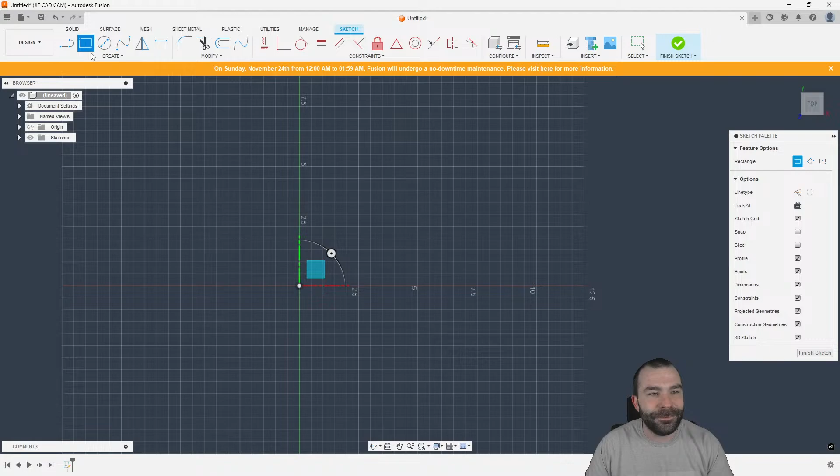So maybe I'll start a new name for myself - not Fusion Phil, but maybe Four-Wheel Phil or something at this point. Anyways, somebody reached out to me late last night and said, hey man, I would really like to draw an intake plenum for one of my automotive projects. I told him this would be a great subject to kick off this week. As always guys, you have the freedom to ask questions at any time, we can pivot to questions you have. I'm going to kick this off with some CAD stuff. Actually, there's Guy himself, the one who was bugging me about this. As I instructed Guy, there were a couple things based off his design that he showed me, and I'm going to show you guys a couple ways you can accomplish something like this. So for any of you that know me, you know I love rectangles, right?

In the event of the design he sent me, there was a stagger when looking down on that actual part profile. So I'm going to go ahead and dimension this up.

As you can see here, we can give that an overall width. I'm going to guesstimate a lot of these numbers, so if you're wondering, the numbers aren't necessarily important in this case. However, you'll be able to scale this up or down as needed. Overall length, of course, as well.

Let's go ahead and put it at 12 inches. From here, we can dimension off the end if needed, maybe 1 inch again at the other end. With that, I can tie those 1 inch marks together by clicking that other dimension.

So this is kind of a mirrored part, it's actually spun 180 degrees. The one that Guy plans to actually use and make at the end of the day, he's not going to have this offset, but the process from here forward ends up the same, right?

So I'm going to extrude this, and what you guys are going to see here is this is going to take shape relatively fast. So again, you have your distance, whatever you're feeling necessary, and then from there I need to set, and I'm going to use chamfer, but the idea is I could set the angles for my intake runners, whatever that may be.

As you guys can see, I'm just using equal distance. Maybe I want to do distance and angle because I need them a little steeper or a little more shallow based on that profile. Fully customizable and editable with this system right here.

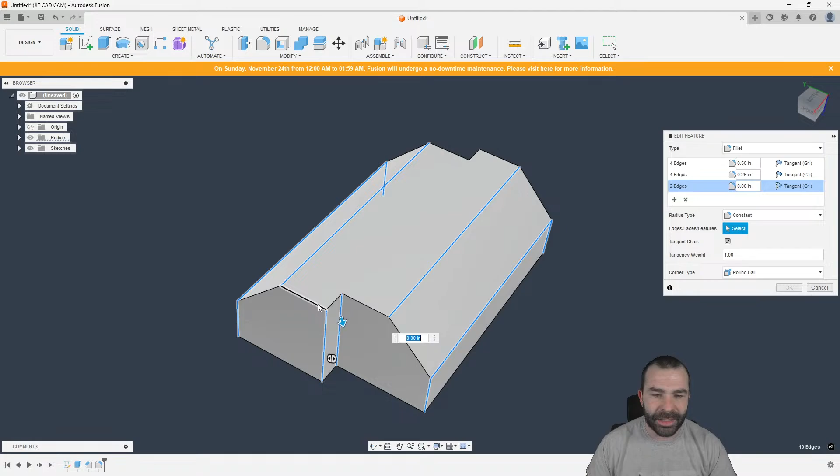And then lastly, I'm going to add a few more as we work around the outside of this part. So give me a few seconds to select all my edges. You're going to see the value of this when we do our next step, which is using the shell command to actually make a tub out of this.

So again, maybe we're going to go to, I don't know, what can we get away with? Can we get with a 3/4? We can't, because it's too tight of a radius in here. Again, we did a 1-inch offset, so maybe we can bump that up to 1/2 inch. Nope, we're going to go down to 375.

And as you're seeing, all those fillets are starting to populate around my profile. Now again, guys, I'm no expert on intake plenums, and I'm far from an expert in the modeling environment. However, as you can see, sometimes it's not about how you get to the finish line, as long as you get to the finish line.

In Guy's case, he loves racing, and if the guy in the other lane blows his engine, you still got a chance regardless, right?

So let's use our shell command and pick our top surface. I'm going to set my wall thickness to whatever I'd like it to be. As you can see, by using the shell command later in the process, it's carrying all of my fillets from the inside right into the outside to the inside. So we're going to go ahead and hit OK.

Next thing I would want to do, in his case, he's going to put a cover on top of this, and we would actually have to give this our intake port in that, but it goes pretty smooth. So based on this face here, I am going to create an offset, and what that allows me to do is generate a flange surface. Again, we'd have somewhere to put our bolt holes down through, and we're going to drag that down. Now we have that lovely lip sitting around.

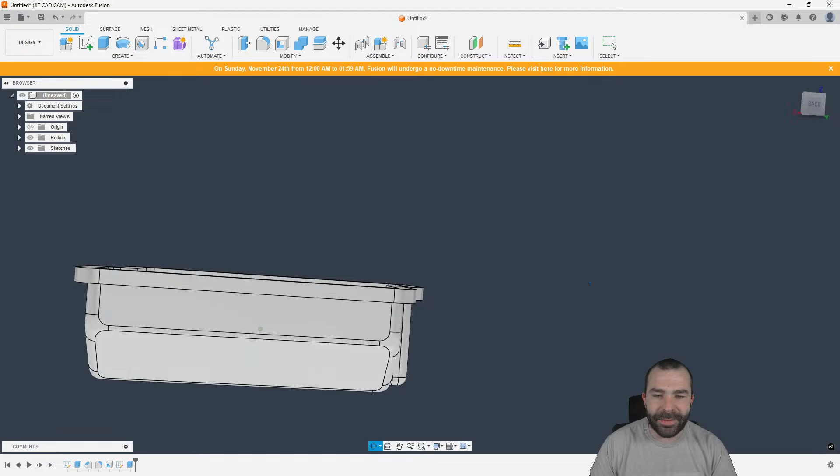If I wanted to, I could also add a few more offsets if you were going to put an actual O-ring groove in here, or in his case, I assume he's going to use Form-A-Gasket. Now again, we could just rinse and repeat the process, right?

I want to put my actual intake runner hole locations. I'm going to drop a line, this is going to be a construction line. What I'm looking for is just to generically place that line on that face, because later on I'm going to come through and dimension that out. That might be a little hard for you guys to see, so I'm going to select it. If I wanted to dimension this, we could set dimensions from wherever that dimension comes from, fully constraining it. Now let's go back and do our circle.

We do not want that as a construction line. I'm going to throw one at the end. Again, this is for a Chevy V8, if I remember correctly, right, Guy? I could go ahead and define those parts and where those hole locations are. Using a few things like constraints, we could equal up our circles. All 4 of these are going to be identical. As you can see here, we've now equaled them all together.

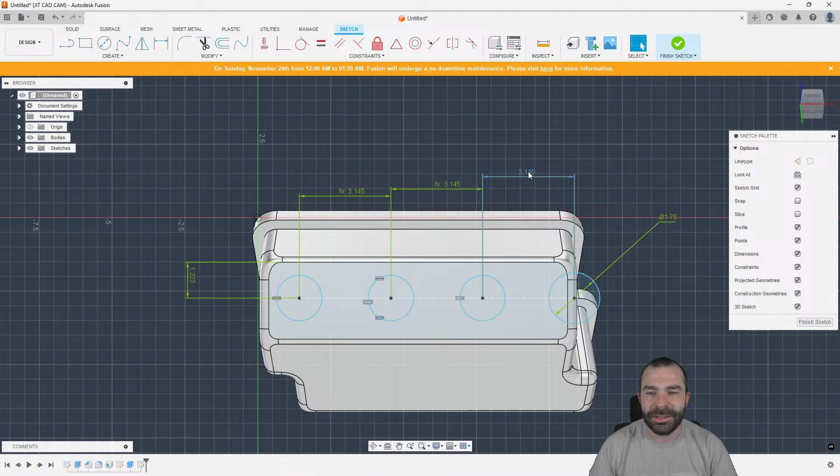And then we'll add a hole dimension, right? So let's say we're going to go 1 3/4 inches. Again, you could dimension from the end, allowing us to link these together at any time, making it easy. In his world, everything is actually kind of on center the same distance. So we could tie those dimensions together, allowing us only to have to change one dimension and making everything shift accordingly. As you guys are seeing here, I'm actually going to undo that because I think my circles aren't necessarily constrained properly, or I typed in the wrong number like I always do.

So what is happening here? This is fun, I always love when we do this stuff and everything goes ahead and breaks in a live setting. As you can see, by typing in the distance between those dots, which should be the circle center, I have somehow automatically broken Fusion, and my sketch has disappeared. This will happen from time to time, it's not a big deal, guys. We're just going to back up a few steps, maybe remove these dimensions, and see if we can attempt that one more time, fixing it.

So again, we have that first dimension. Let's go ahead and set the dimension for the first gap and then go through and dimension again and make sure things don't break. Now, I'm going to go out on a limb and assume that I don't have one of these circles actually on that line, and that is where those problems are coming from. The same thing here is it looks like, although I went ahead and dimensioned my first intake hole or my runner hole, I forgot to actually constrain them all to the same size as well.

So let's go ahead and equal those up. Again, we'll just get this a little bit away from the fillet. And then once we get those set where we like it or whatever we're going to do, we can simply go through and extrude those holes.

In the meantime, I see a lot of you guys out there, hole 3 and hole 4 not equal. Yep, I just caught that.

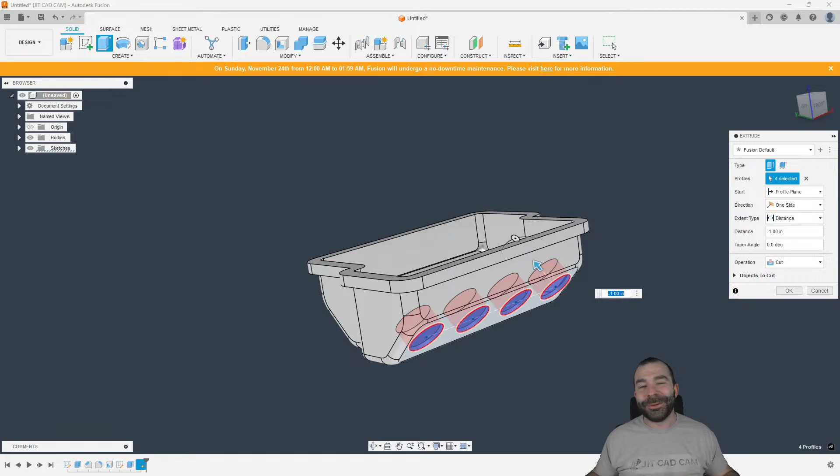Deep Thinker, great to see you in here. I should run through chat here. Adrian, awesome, hello, great to see you. Who else is up in here? We have Travis, Tim F's Adventure. Yeah, volume went down 100%. It looks like Chris Carter too. Guys, I love seeing you guys all in here. I busted out, this is the first shirt. So if you guys didn't know, I made this shirt with an iron and that printout when I went into business over a year ago off on my own.

So again, you guys can see we went ahead and made our intake holes or our runner holes for that intake. I could also add, again, another sketch, do the same thing on the other side, just a repeat. Maybe I want to give this a port to the front.

Again, everyone is different, let's not show favoritism here, even though in my opinion, yes, Chevy is much better than Ford. But let's go ahead and do an ellipse as if this was going to be our front intake hole here. And again, we do that extrude. We could do an offset to create that flange feature. No right or wrong system here, but as you guys can see, it's relatively straightforward to do something like this.

I still need to add my holes for bolting my two halves together. We could do that simply by placing our first hole over here. I'm not going to get too crazy with its location. Let's go ahead and say that's a 250 hole.

Something I think a lot of people don't realize Fusion can do is use the pattern tool to do a pattern on path and pattern a feature. I can go down to my timeline, grab that hole, and my path is now the actual rail inside my part, so I can create a hole pattern that chases around my part. Notice here I'm on center, aligning to the path based on one direction.

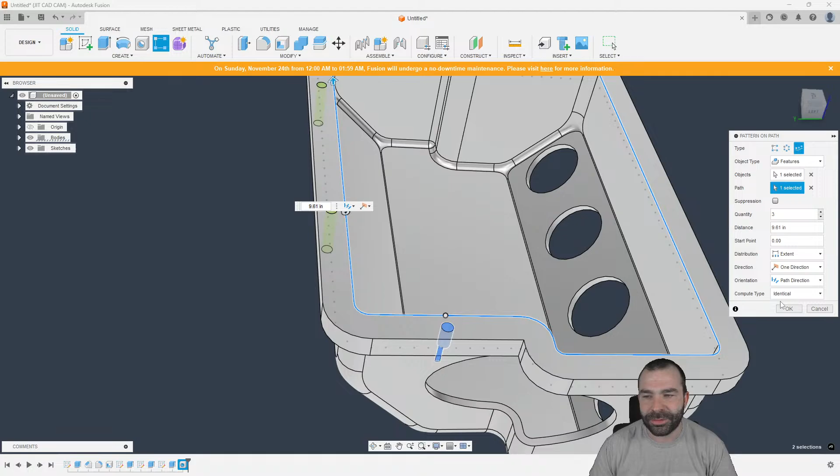We can go in and change this—say optimize, say identical, or change to path direction. Based on the path direction, it is now aligned to the outside of my part profile.

If I wanted to put in 24 of these and drag them all the way around, that path is going all the way around my part. Whatever the length of that inside area is, I can generate all the way around my part. So it's very easy to place all those holes for bolting my two halves together.

The reason I like using pattern at the solid level is, one, it calculates much faster, and two, when I'm creating a feature—whether an extrude or in this case using the hole tool—I have the ability to roll my timeline back and go, hey, I forgot I want to put a chamfer on the top of that hole.

For all of you in chat, don't hassle me about the fact I could have done that when I used the hole tool. What I'm showing you is that by putting it on as a separate feature and rolling my timeline forward, I can add that as an additional object in my pattern. So by adding the chamfer with the hole command, it's automatically going around and creating that pattern.

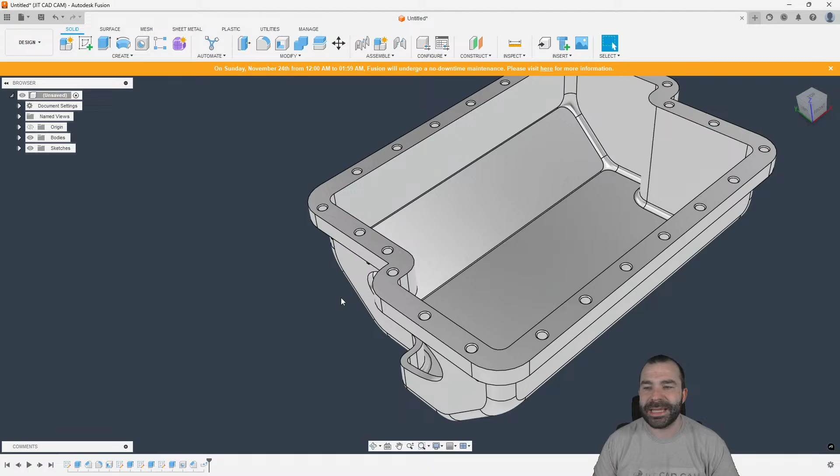Any other questions out there? As you've seen, I've been able to do quite a bit in a short period of time, all because I've structured a pretty simple timeline down at the bottom, allowing me to adjust along the way. Although it looks like a complex part, you can very efficiently design something complex if you take a few steps back to work on what you need specifically.

Again, stacking up my fillets all in one spot, doing my fillets before my shell command makes all the difference for the way that volume is removed.

Uh-oh. Hey, Kosh, how's it going?

Did you have two separate components in an assembly and then remove any intersecting geometry? Yeah, 100%—you can do that fully.

So Autodesk Fusion 360 Ambassador—what is that title? That's a good title. I prefer the one my wife calls me all the time: the guy that has no idea what he's doing.

But you are correct, so what I'm going to do is create two components as he's asking. We'll go ahead and use A, and again we'll go up and do B. Then we're just going to create nothing more than simple shapes. I like simple shapes because the idea isn't necessarily the body itself—in this case it's going to be the outcome of the two bodies. So at any time, Kosh, if you see me doing something wrong, please let me know, and if you were thinking about this a different way, by all means let me know.

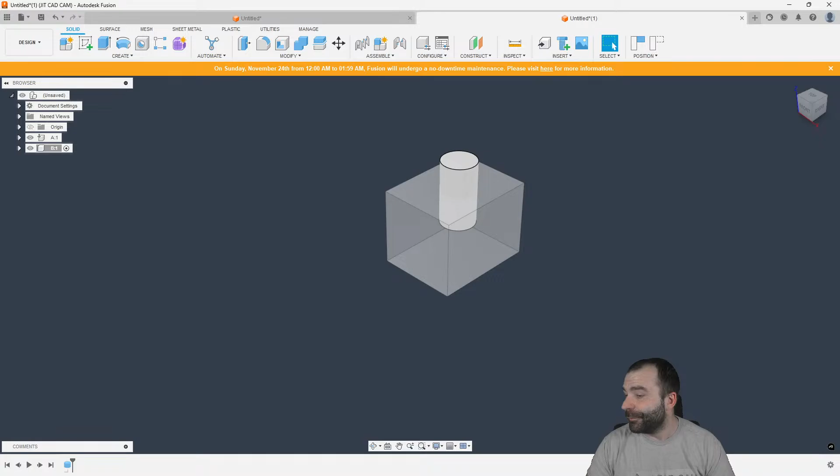So you want to remove the intersecting geometry between the two. You don't want to keep intersecting geometry; you want to just remove said geometry. So if I had two parts overlapping as such, if I did a combine command, one, I am going to capture this position because you guys saw me manually move it. But if I took my two parts and said cut, I can cut one using the other in this use case.

So what I would do is actually reverse my selection here, pick my actual cylinder, then pick my square. And as you can see, I'm now removing the intersect between the two, but I want to keep my tool. What that means is we're going to keep that original part there. So by hitting OK, you can see I now have a shorter cylinder, and on top of that, I'm still retaining that actual stock box in the background.

I apologize for the stock box. The machinist in me says stock box.

But just like that, doing that combine, I am combining two bodies. I'm actually cutting one body using the other body across two completely different components.

I guess today's kind of design theme, huh? I mean, that is it 100%. So, Chris, I am so glad you pointed that out because this one will blow your guys' mind. This one, I actually made a short video in my YouTube collection. It's probably one of the worst videos I have made. The audio sucks and the video sucks, so it's a twofer.

But if you're doing soft jaws, right? And I'm going to do this the worst way possible. But let's just say here's one of my jaws. And now I want to go in and cut those jaws. But I'm going to draw a part that's going to cause kind of a dilemma, right? So let's say this is my part. And you guys will see this come full force here in a second.

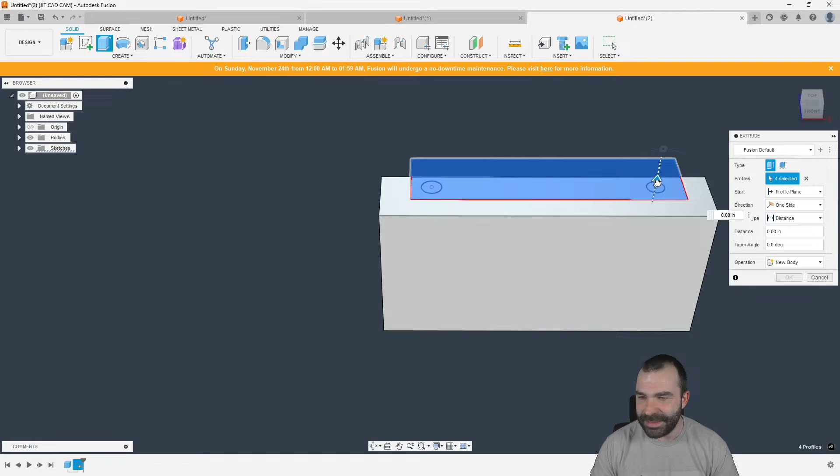If you're making soft jaws, let's go ahead and bring this down. It's going to be a new body. And we're going to repeat that extrude back the other way, right? Trying to think in my brain which way I thought to do this. Okay, we're actually going to extrude this outer profile back up. Again, new body, and then we're going to combine these two things together, right?

So we are going to end up with a kind of funny situation here because I am now going to move this downwards, right? Oh, back up a couple of steps here. Because when we went in and did our combine, we don't need to keep tool. Okay, so we're going to move this guy down, right? And we're going to cause a conflict with what's going on. So we want to move the whole body.

There we go. So if I do a soft jaw kind of move here, I'm going to do my combine, and I'm going to cut this using this, right? Now, as you kind of see, we're going to have these floating cylinders there. And this used to happen to me quite a bit. We're going to keep the tool again because I would like to keep my part for machining purposes.

But notice what happened to my body count. So I'm going to back up. We went from one body to two bodies. And when I did that combine, we now have three and four bodies, right? So you see these two guys floating out in space. And you should have done this with components, which would have been the right way to do it. These are going to get in your way. They're going to cause problems.

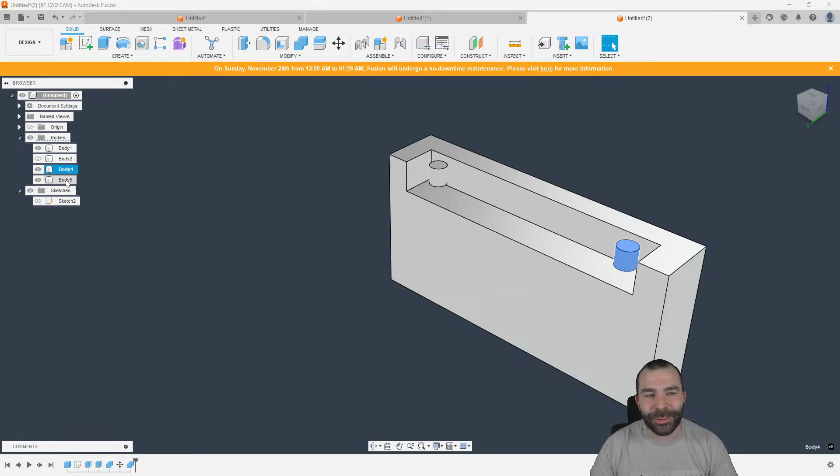But I can actually go to these bodies, right click, come down here and hit remove. And what that does, as you can see, is remove that body completely out of my timeline, right? So because we have that floating individual body or piece of a component out there that could cause problems, you can just right click and remove that stuff to get it out of the way. So I'm going to get back over to the chat.

Awesome. 100% perfect for soft jaws. Cool. Yep, you can 100%. So you have that ability to modify a body using another body, even at the component level. So you can jump across components depending on that.

Kosh, if you're still out there, I would show you this one as well. I think a lot of people don't quite think this through fully. This is a really good example.

I designed this as an individual part rather than a component. I actually broke a rule because at the end of the day, the guy's going to want to put his runners on here as well as that top hat section. So what I'm going to do is save this as plenum lower.

The proper way I should have designed this is to start out with new components, as you saw me do. It's too late for that, but early enough that we can restart the process without redesigning everything. So I'm bringing that component in and breaking the link, which turns our new file into an assembly up from the original component.

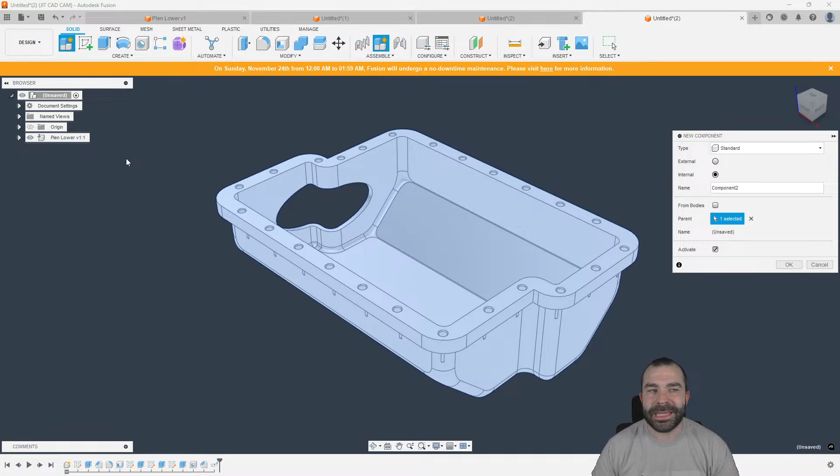So now we have our upper section. By having my upper active, I could create a sketch against this face if I wanted. For demonstration purposes, we're just going to keep it very square, but I want to show you why this is so important.

You'll see all these holes pulling through automatically. The way my timeline works is kind of like chapters in a book. You don't want to jump from one chapter to another or read a chapter before certain others.

Yours truly doesn't know how to read. Still sometimes have to take my boots off to count to 20.

As you'll see, I can at any time in my timeline, if I remember that pattern, go back and edit it. Because that pattern occurred long before we created the upper component, you're seeing it jump across components with its history.

When you're designing or building an assembly, it's nice to create your features in a certain order so they carry through from one to the other. We wouldn't want Guy to have a problem with his actual bolt hole pattern not lining up. That's how we've now stacked these two together to achieve that task.

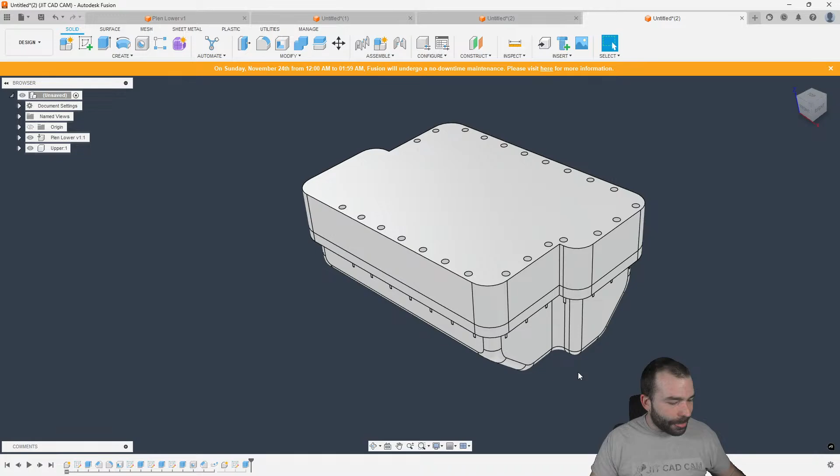Another thing we could do is just rinse and repeat from here, guys. We can add another new component. This could be, you know, left-hand runner. Again, we create our sketch based on our spacing here. This is very valuable to know as we start to build our other items.

So if I go ahead and create my offset, I want to go ahead and create a flange around this possibly as well. Let's go ahead and just do nothing more than a slot. Make our lives easy.

This is going to look a little wild. So those of you out there always judging me about how terrible I am at some of this stuff, more than okay. But there is our flange.

Now I can go in, and if I wanted to extend out the actual tubing, I could do that as well. So again, we could do our join.

Maybe he's not going to use something of this nature. He might actually use a loft between two surfaces. You guys have a lot of ways to manipulate this. The idea is you're now starting to see the way components stack up and the way you can place components to achieve whatever it is that you're trying to do.

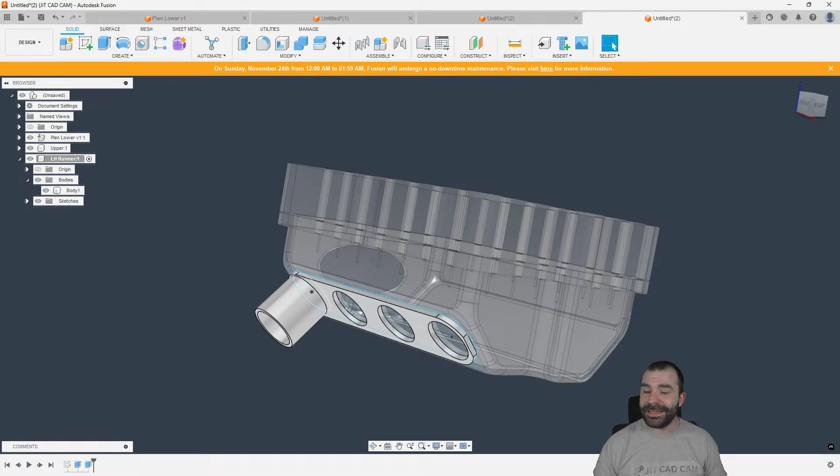How's everybody's week outside of that? I'm surprised we don't have any CAM questions yet. People are like, oh, he's doing modeling. Do all this modeling stuff. This will be fun. Again, opening that floor up for any questions, any problems anybody's having. It always seems like you guys just more enjoy watching me work than it is anything else.

Deep Thinker, I see your question. So is that one solid body now? When I did that, no, that actually turned it into two separate bodies. I can't remember what part you were asking about, but when I did my combine command, I actually pulled it to do a cut and keep, not a join type of scenario.

Anybody else? I love when you guys don't ask questions. You make me nervous. Should I just keep plugging away at something like this? That's what I'm going to do. I'm just going to keep designing this part free of charge. You guys will be able to see it all.

What we're actually going to do is we're going to change things up here a little bit on how this design is. We're going to go new body. Let's actually go down a ways. And we have that flange now. With that flange, we're going to start to build out the next little segments. So what I'm going to do here is I'm going to actually reach back across.

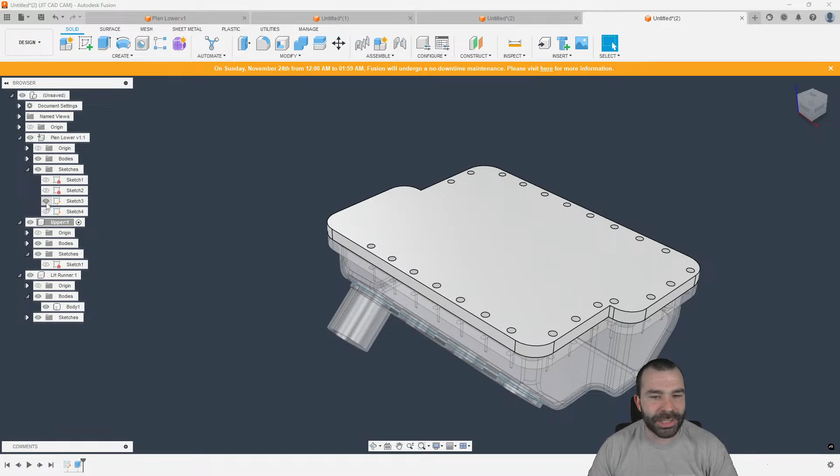And what I'm looking for is the sketch to the lower. Where did we do that projected sketch? Let's go back. There we go. Again, we can go ahead and use that sketch by getting the body out of the way. And we're going to take the outside and the inside. Again, bringing it up, doing a join because we want those two bodies to intersect. And then from here, we could start to change and modify our profiles.

Is there an easy way to work with a DXF file without clicking thousands of lines? All right, that's a good one, Chris. Chris, what is your application is what I'm going to ask you. Are you trying to do laser plasma work, or are you trying to convert a DXF to a solid model? And I would also have to ask, are there multiple sketches in this DXF that you're referring to?

In the meantime, we're going to go ahead and turn off the lower, and let's go ahead and get the left hand out of the way because we can go in and do our shell command again. Now, what you're going to notice is based on our shell command, we have that full freedom to go in, plug in whatever it is. But one thing that is going to happen here because of our holes, again, our timeline is very important to how things are going to interact with one another.

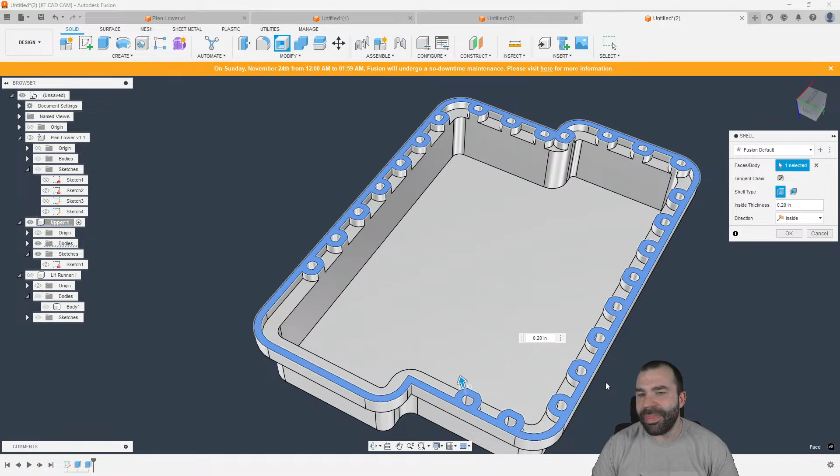So we may want to extrude those holes first time round and then come through and put the holes in later. So you guys did see me do something that could be classified as a little bit lazy. And we could roll back our timeline again to when we did that first extrude. I'm going to go in and we're going to actually punch all the holes in this here real quick. Again, what you'll see happen now when I hit OK is it has fixed and cleaned up this edge. But something it has also done, based off how we've done this, is it's not only shelled out the entire part, but it's given us that wall thickness through everything.

Engraving with a CNC. Okay, I like this. This is a good question. So I would say, are you using like trace or 2D contour for the engraving toolpath, Chris? Mastercam. Gonna use Mastercam to select all those edges. Awesome. So Chris, check this out.

So I actually had to do this with a customer of mine. I am gonna replicate this because I do not actually have a DXF to pull up quickly, but I've completed exactly that, right? So I have my sketches here. I am going to go ahead and place this on a box, and then we're going to have the freedom to engrave this as you're asking.

So when I go to manufacture, if I'm going to do my normal setup, this is where we find out that old Fusion over here doesn't know which way Z-axis is. But if I go to 2D Trace, for example, and I'm using 2D Trace because it's on center, as well, it is not utilizing a lead in and lead out scenario, right?

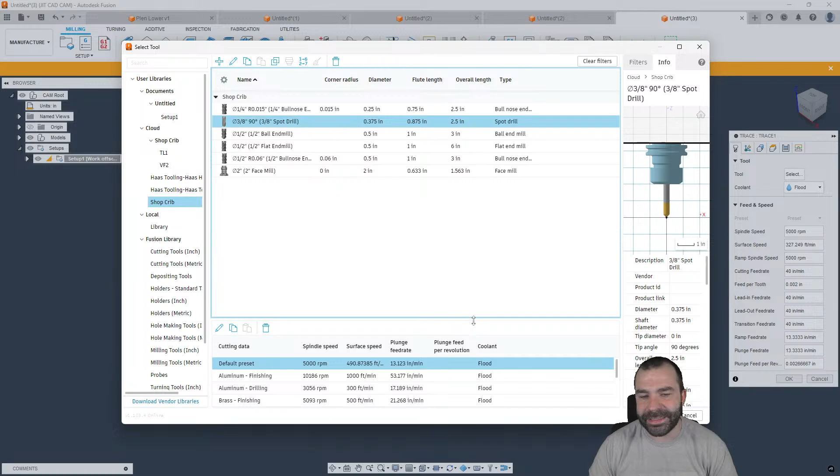So I've picked my tool. Now, in Chris's case, he doesn't want to go through, and as you see here, I have 3 separate little segments of lines that I would have to pick. Now, I did luck out because these are boundaries, so it does actually see this as a closed chain and loop itself back around. But what I can do, instead of selecting all these edges,

I'm going to go back to my model, and where that DXF sits, which is going to be a sketch, I can pick that instead. And upon hitting OK, what you're going to see is that it is now going to go out and trace that actual sketch, regardless of how it looks.

And if I was to go back to design, this is, again, kind of something nice. So if you wanted to change this, maybe we're going to add a line across here for that customer, and then I'm going to sprinkle in, let's throw a spline at it, right? So again, when I add more sketch lines to that sketch, when we jump back to manufacture, of course, we'll have that error, but upon regenerating, it's automatically picked up on this. So this is super handy if you guys are doing any engraving of parts, part numbers, anything like that.

Chris, I know, right? I love doing these videos on Friday. It was shocking to me when all of you guys came in and told me about broaching, and you're like, oh, we use trace for broaching. And I've never thought about trace for broaching. And now there's a video about trace for broaching.

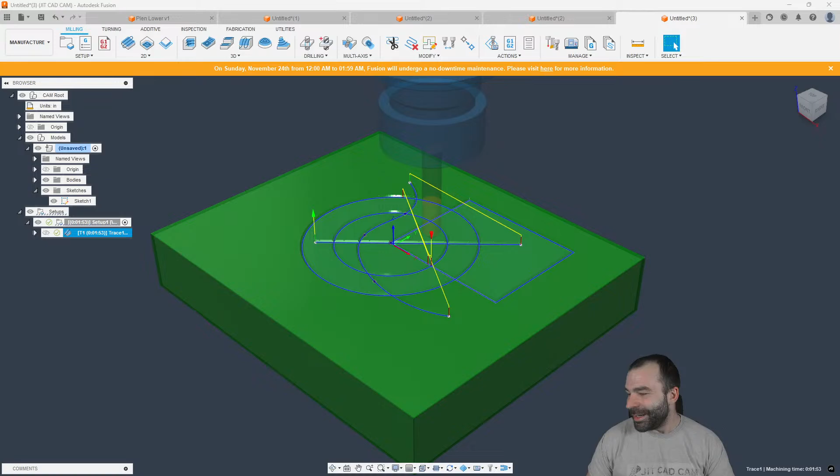So I see Not Sure, that's a good name, Not Sure out there. He is saying window select. So you could do a window select in some cases. You're not wrong. Again, we could go back to our geometry. If we get our model out of the way, you can do a window select. And what I'm doing is right click circle here. So again, you do have a couple of different ways to try to select that geometry. But I would still tell you the fastest way, in my opinion, is to do everything based on picking up that sketch, based on your actual sketch plane from your design.

Any other questions outside of that? We see 14 people in here. I see a high number, 14. 14 is a high number today. I think the most I've ever seen is 21 active viewers at one shot. What other kind of crazy questions do we have lingering?

Oh, here we go. Deep Thinker, what do you got for me? Dumb question. Make a large V block. I'm looking to see if you can rough out the V with an end mill and finish with a tapered tool. Easy enough. I tell you what, though, Deep Thinker, you're in here all the time, man. I might have to start charging you beers.

So what we're going to do is a V block, right? So rectangle and a V profile. And for perspective of me not knowing how big I draw stuff, we're going to shrink this down just a little bit. And we are going to give this a solid number for an angle so that it doesn't look silly later on. And how tall are we? Let's shrink that down to 2 inches. That's something like you're thinking right there, Deep Thinker. And we'll mirror this across. I saw another question come in, so guys, give me a hot minute to get this part. I'll wait for Deep Thinker to let me know if this works.

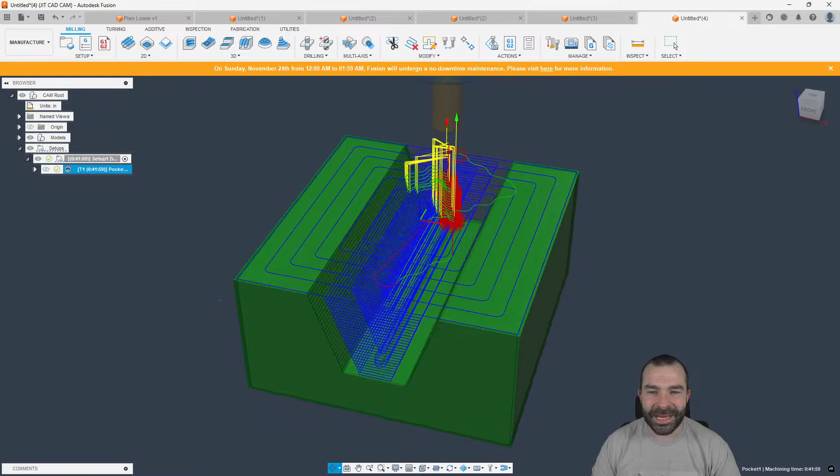If I wanted to machine down this face with a tapered end mill, we set that angle to 20 degrees. But if I go ahead and do 2D contour, I need a tool to do so. We'll pick either a chamfer mill or a spot drill. I can't ever remember which one is correct for this, so you guys get to see me double duty this. But we're not at 120.

We should be, let me think, what is it? Oh man, math is going to get me today. So 90 would be 45, which would mean we need to go to a 40-degree angle, because this is an inclusive angle from side to side, not from centerline. So there's my 40-degree tool.

Now if I want to machine this wall and come down that taper, when I go in and set my multiple depths, if I still remember, there's what's called a taper angle. So you can set your wall taper angle here. Now with that, if I select the bottom of that pocket, you'll see we can define that tool to go down, or we can crash the tool path.

So this is where I always forget, is it a chamfer mill or a spot drill? As you can see, you can't do this with that tool in particular, and the reason is because that's forcing the idea that you're doing chamfering. So we'll turn off chamfer. Now, as you can see, it's running across that horizontal face and stepping down as it does so.

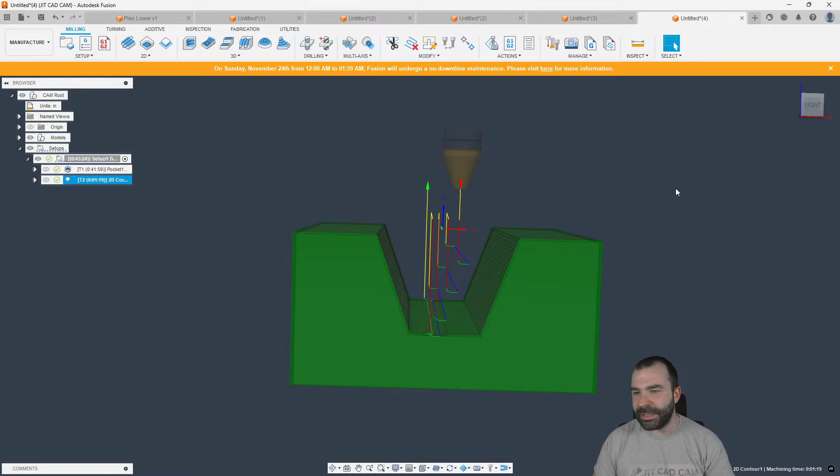Again, that's with your flat tool running down that wall. Now keep in mind, just something for you to remember, I selected this edge down here, so what's happening in this tool path is it's aligning the outside edge of this tool, and that's why you're seeing it kind of walk itself away a little strange. So I would need to define the edge I wanted to pick further out. If I pick this edge here, and say I want to go to a selected bottom, picking the bottom of my profile, notice how my tool has now moved over and is now machining down that wall, as you see.

100%, man. And I don't like taxes. I don't think anybody likes taxes, right? Nothing like taxes on payroll, taxes on your purchases, taxes on your home, taxes on your car.

What do you think, Deep Thinker? Is this going to work for you?

In the meantime, anybody else have any other questions? You guys are coming and going quite a bit. So I don't know, you guys on lunch break, you jump on like, oh man, this guy's doing live, and then you come in here and he's machining down a tapered wall. That's pretty crazy.

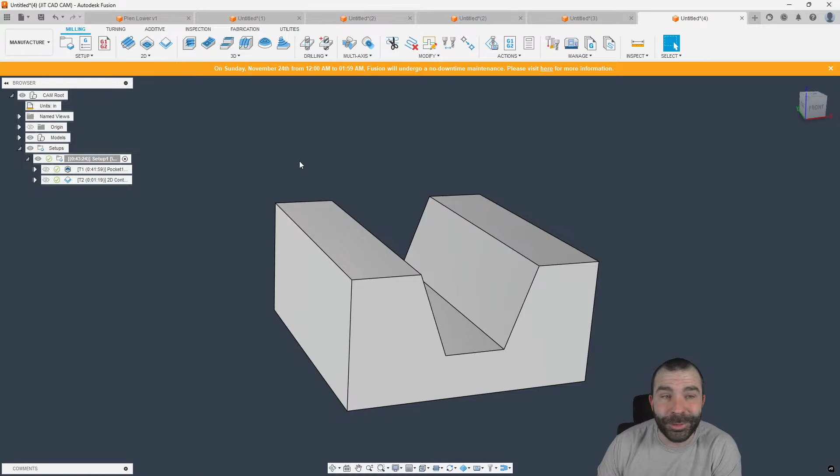But in the case of this, sure, not sure, we'll go ahead and do it with the ball end mill. So if I go in and do 3D contour, there's a couple different ways you can do this.

I'm going to show you contour first. I'll pick the boundary I want to work with, then click it a second time to extend that boundary upwards. Now I'm going to allow my tool to stay centered on the boundary, and turn on what's called contact point boundary. Contact point boundary will shift that tool from center line to the center of where the radius sits. We're going to swap our tool out for a ball - here's our half inch ball.

We could change our step down to whatever it is. I'm going to leave mine at 40, and we'll see what we get. As you can see, I could come down that wall with a ball end mill, pretty straightforward.

Now if I would have left off contact point boundary, just to give you an example, you're going to see we start higher up on the part, meaning we're starting over the edge of the part and coming down that wall. So what you see is this kind of hockey stick effect - being a guy that's played hockey and lived in the polar north - that happens, but also at the bottom, because the center of this tool can't go past this lower edge we selected. That's why we use contact point boundary.

So again, we'll kick that back on, hit OK, and then we're going right back and forth across there. Yeah, so you can definitely zigzag.

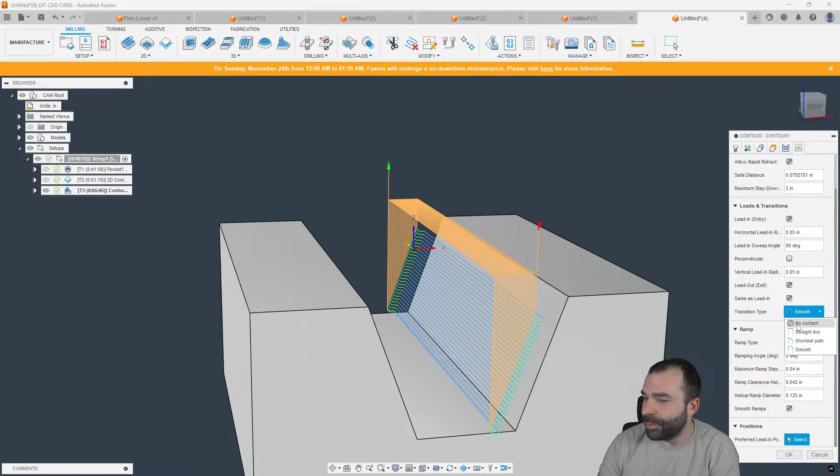So what you could do is actually say, if I really wanted to streamline this tool path, we're going to say both ways. And then we could tell it not to retract - we could do a plunge, a profile, a no contact, shortest path type of transition. Again, we're still getting a helix here.

So let's pop that helix out. Again, we're just going to plunge. And now what you're seeing is a loop in, loop out, real fast procedure just to go down that wall.

I do want to get back real quick - let's scroll back up in here. Mads had a question about thread milling. So Mads, I'm going to go ahead and answer that question. Are you still out there?

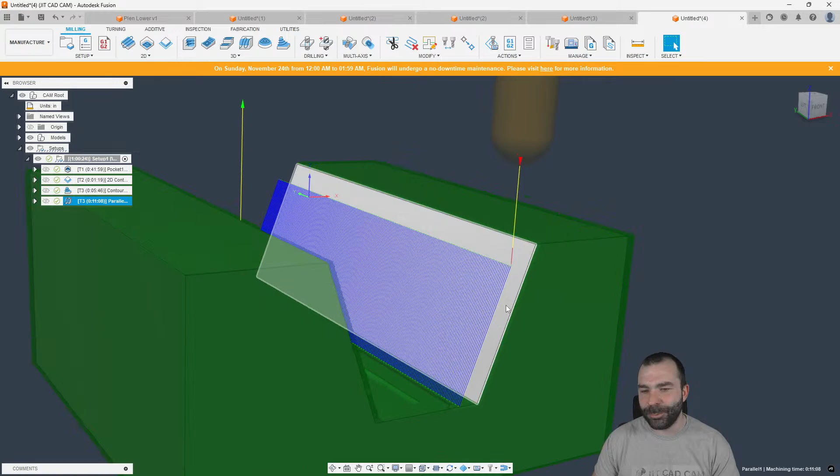As you can see, we could actually run up the surface or horizontal to the surface, all by defining a direction, right? So I could say I want to set a direction this way. And now we're machining back and forth along that surface again.

Good afternoon from Calgary. Awesome, always happy. Is that Calgary, California, or is that Calgary, Canada?

Looks like we lost Mads, but Mads, I'm going to go ahead and attempt to answer your question. So Mads had a question about creating templates that involve thread milling.

So in the event you are doing thread milling or tapping inside of Fusion, there's a couple of things you could do.

So let's go ahead and do a rectangle with a hole in it. Let's say, for example, this is my hole, right? If this is a half inch hole, let's go ahead and make my block a little bit smaller.

And I want to create templates for something I'm doing, so I have a lot of options when it comes to those toolpath templates.

Keep in mind, in most softwares, I'm going to attempt this as a half 13. When your software, if you're not using Fusion, creates a hole, it's usually defined as a tapped hole, which means it's going to be the minimum thread diameter internally or maximum thread diameter externally.

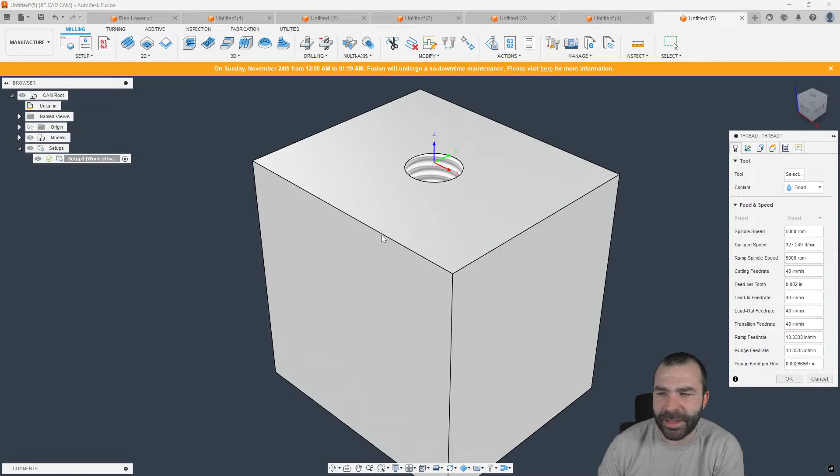Now, the key element about thread milling is the fact that you need to know a thread pitch, of course, as well as your pitch diameter offset. What that is, is how much larger does this need to be.

Now, a lot of people overthink this, but this is based on a diameter amount. Given we're doing a half 13 hole, we would set this to whatever it is. I'm going to make a very uneducated guess of, what is it, like 77?

And then our thread pitch is going to be 1 divided by 13. And as you can see, we could set our thread pitch and our pitch diameter. And now it's going to ask us, what is this hole?

Now, if I was making templates, this is my opinion on it. I would actually, instead of saying a selected face, do diameter range. What diameter range would allow you to do is find any hole between, let's say, 420 and 440. And what that will do on your part is go out and find those holes specifically.

Now, I'm going to set this a little bit bigger because I think my dimensions are way off, and this is not quite working the way I want it to. So let's see what is causing that problem.

Let's go for a selected face. And, well, obviously, I know the problem now. You guys know the problem? This happens every week. Yours truly gets too fast.

I'm going to pause. I'm going to let you guys fight it out in chat. Why do you think this isn't finding the hole? This is on you guys at this point. You guys get to sit back and think about this. First one with the right answer, I'm going to give you a shout out.

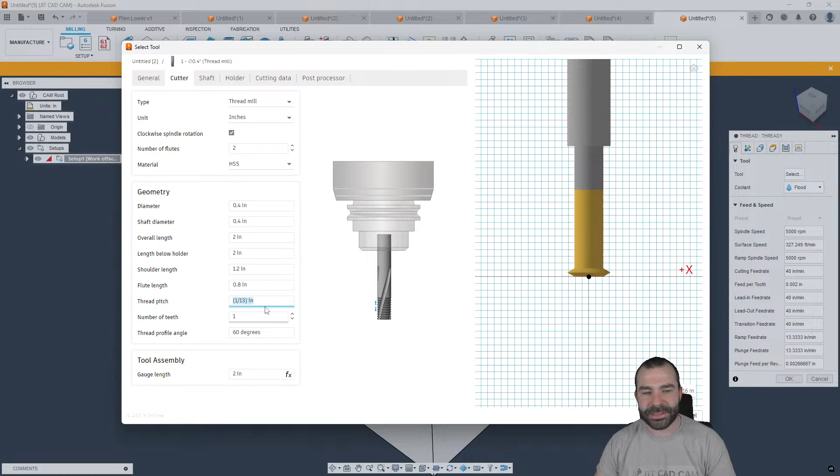If I can find the thread mill profile, there we go. Cutter diameter 0.4, awesome, so that's going to fit inside of our hole. Now, one cool thing you can do here is set our thread pitch, 1 divided by 13, because it's for a half 13. And from that, we have everything defined.

So again, we select our tool. Now you can see that tool is populating our half 13 threading cycle. So if I wanted to turn that into a template, I could do this based off utilizing a diameter range, and now I could close in that diameter range.

Mads, I see you back here. But I'm going to show you another thing that's really neat about this.

So if I actually call it a selected face and pick that face, one thing I can do, when I create my template, I think a lot of people overthink this, is there's what's called store as hole template. And what that allows you to do is give you the ability to pick the surfaces from this template.

As you're going to see, we're going to go ahead and put this in my template folder. You guys all know I don't use very many templates, but now that I have that built in, if I ever have to do a half 13 hole, you can make that decision.

Do you want to use hole diameter? I think I would recommend hole diameter, so you don't apply the wrong template.

But if I go down and say create from template half 13, it should have populated me the question to pick circular faces, and for some reason mine did not. And that is the major difference between a hole template and a regular template.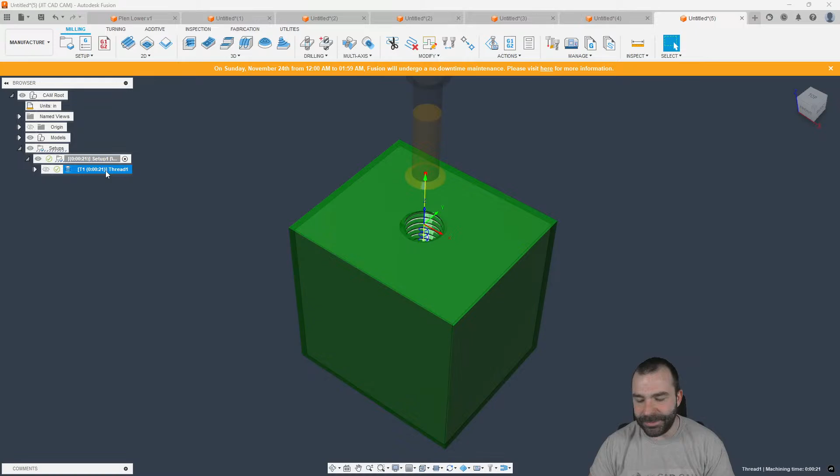So again, let's go ahead and take a look here. It did save it as a correct template. However, maybe with thread milling, it doesn't accept the fact that it is a hole template.

Nope, so it doesn't think that it's a hole template, same as if we were to go in with our 423 drill. Give me a quick second here, guys.

In case you guys didn't know, you could search this in the top left corner, you don't have to scroll wheel it down. Again, we do our select hole.

Boom, let's turn this into a hole template. So again, drill, save it to the cloud. Sure, let's override it. So the way a hole template should work, and it's not doing it on either one of these.

This is kind of cool, this is new to me. Let's go through and try this one more time.

Let's add a little bit more info to our hole. Let's stack two of them together.

I'm waiting, I'm avoiding looking at my chat right now, if you guys are wondering, because I don't want to look over there and then you guys be like, yeah, you can't do it with just one, right? Let's do it this time.

Again, let's go in for our template operations. Yeah, so there must be a bug. It used to actually prompt you to select a hole. So it looks like something crazy has happened in the background of Fusion once again.

I know there was a bug within the last 5 days. They updated, and then they updated again today.

Every time I open Fusion, as you guys know, I am a big fan of anything dark mode. But I use River Rubicon as my background versus the flash bang of the white screen right now. Your boy's pretty white, it's very reflective. But for some reason, that last update, every time I came in, the River Rubicon was defaulted back to photo booth.

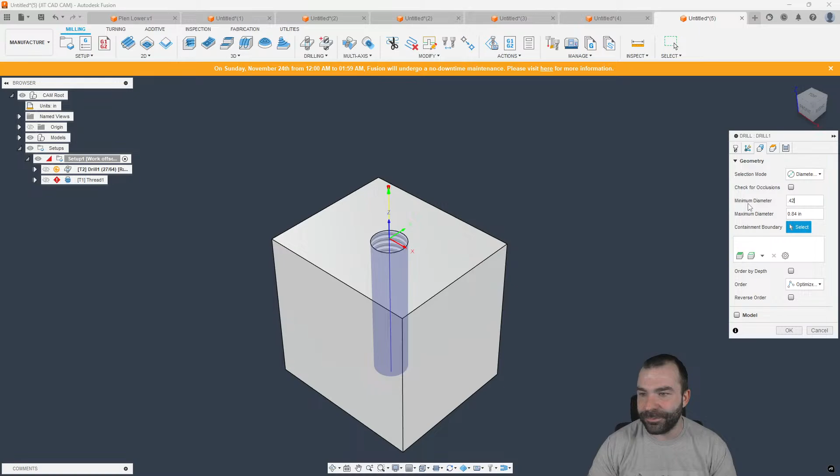Because if we would fix this, and we would go back to like 420, to what, 426? Oh, let's see here, 426. Oh, we got to go a little bigger, maybe I was off on my size.

There we go, again, now we are using a diameter range. If we store that as a template, we can pull that template at any time. And now when you pull that template, with the exception that you would have to regenerate, actually mine is set to auto regenerate, so you can see it automatically finds the hole now.

So I see another question from Not Sure: can you prune/graft an existing model in the CAD side? Can you send me a link to an example of that, and I will see what I can replicate inside of Fusion? Keep in mind, I've been out of Mastercam now for probably 7 years.

Any other questions from anybody out there? What do you guys got for me? Again, opening up the floor. What time is it? How long have we been going? We've been going 50, 53, 58 minutes.

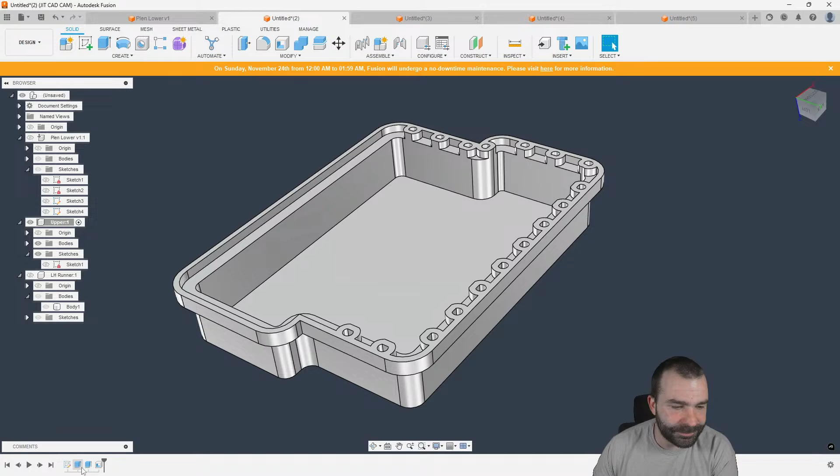We'll go ahead and clean up some of what we had on Guy's part here. Let's go ahead and get rid of some of these dummy files we have floating around. So what we're going to have to do here is change the order in which we did some stuff. What I'm going to do is not extrude that outside flange. Let's go ahead and delete. And we are going to re-extrude that profile. There we go. And then if I do the shell command now, you can see I can create that inside profile.

And then with that, I'm going to turn on that flange sketch that we've drawn. And now if I extrude that outside flange this time, I can very easily create that pattern or that lip to bolt the two halves together. Now, if you don't know, I've extruded this sketch here, which means there were no holes projected when we created the sketch. Now, if I go down to our other sketch, and let me delete this, let's do that extrude from our other sketch. This sketch has all the holes already in it, right?

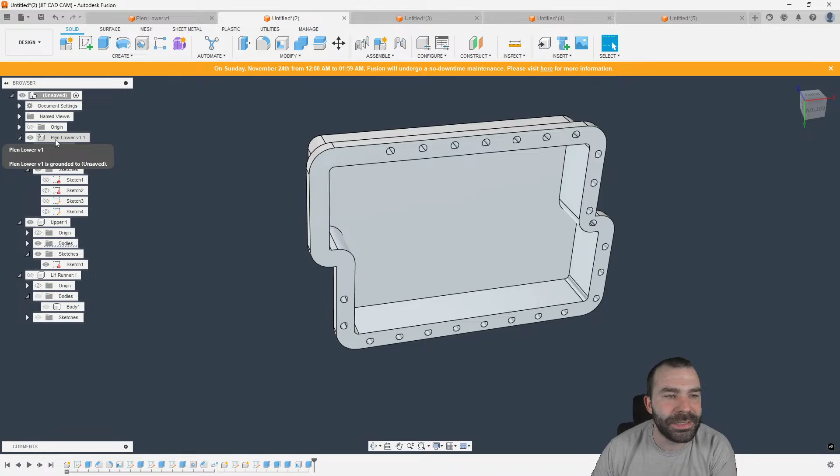So if we drag that up and we say join, we now have our two halves. They're joined together, with our through holes. Again, not the cleanest of things. We do have a line intersecting those holes because they're too close to the profile. But as you can see, from one to the other you have that carry through relatively easily, making that upper plenum hat piece mate to the bottom part and align according to all those holes. Because we've used one component to design our other components, we always have that freedom to go back and fix anything and everything.

So I'm going to go back to that original hole. Now, if I couldn't find that hole for some reason, it's kind of cool in Fusion. You can pick a feature that you're looking for, and it will highlight it with the 3 lines down here. Now, that is in my pattern, and that's why it's recognizing the pattern. But if I go a couple steps forward, you can notice it finds that first hole, right? So sometimes you've got to do a little bit of detective work.

In this case of detective work, we're going to drag that hole further out, so my holes are now pushed further out and around my part. I'm actually going to delete the chamfer out of here because I'm going to chamfer it later, and I don't want that chamfer to be the profile that's pulled into the upper part of my design. So we can trigger all of that and go back to our timeline to walk through what has happened.

Now I do see some other questions come in. Let's see what we got. Deep Thinker asks: do you have a go-to design to do a patch skin to avoid pockets or holes, or can it be done in manufacture? Oh man, I love this, this is a good question. Deep Thinker, there's probably three or more ways to do this.

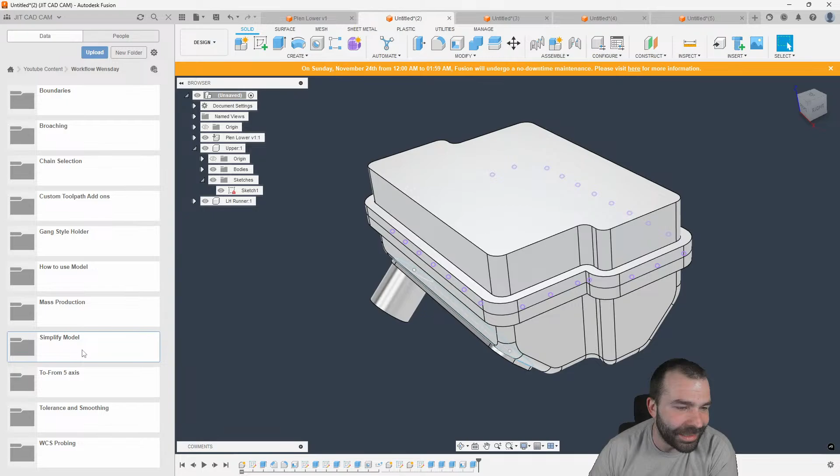Next Wednesday I have quite the thing for you guys. I'm going to do a Workflow Wednesday, and to give you guys a taste of this, let's see if I have a model over here yet.

So what I'm going to do is give me one quick sec. I'm going to take away my screen because I need to do something to this part before I pull it up, and it's not me trying to bait and switch you. I just need to manipulate this body so that nobody gets a nasty letter. So give me a quick second here.

And there we go. And there we go. I'm actually using the remove command. I know you guys can't see this in the background, but there.

All right, I've got to do a few more things to this part just to clean up the design.

How's everybody's week so far? You guys have a good week? Bad week? Glad it's Friday? Bad it's Friday? All right, let's save this.

Okay, so I am now going to reshare my screen so you guys can see this part, right? So a customer sent me this whole concept. They were like, you see this part, you see all the things going on in this part, how can I remove certain things on this part?

Now old Fusion would have told you to go in and pick the feature you want and hit the delete key, right? Well, you don't need to actually do that. This comes in as a step model natively, and as you can see in my timeline, with the exception that I've modified its design so I don't give away anybody's parts, under the Modify tab — and you do have to have your timeline turned on — you could actually do what's called Remove Feature.

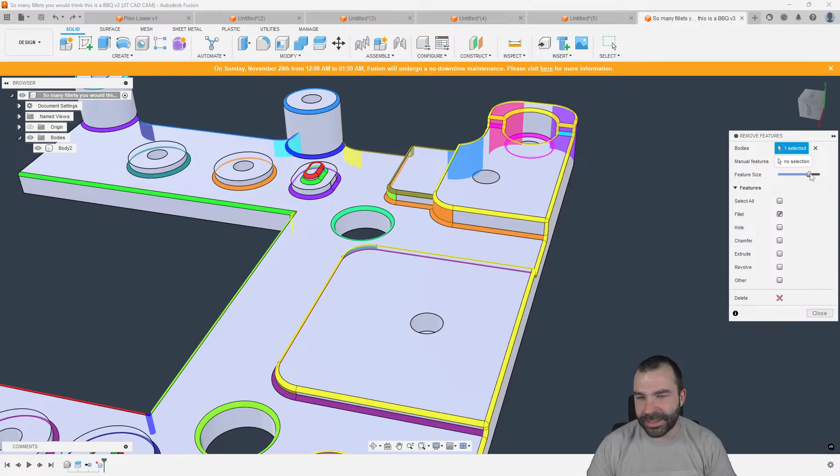So if I want to remove all fillets, as you can see here, I can do all fillets on the part, or I could scale this up or down to only do certain diameter fillets. What you're seeing in real time is I can go in and delete those, and now it's re-recognizing new fillets, again because certain fillets are stacked on top of one another.

So if you're looking for a really good workflow: one, you should never modify the part you intend to make. You would do a copy and a paste so you have two versions. Let's get the original out of the way, and then we jump in and do our simplify — let's go ahead and remove the fillets. Just like that, we've deleted all of those features, and now we have two completely different parts to play around with.

On the manufacturing side, I've done a video on this, but it's really good: if I wanted to go in and adaptive clear out this part, there's a certain time to add model. In my setup, when I create my setup, the part I want to manufacture needs to be the finished part for the customer. In this case, I don't want the part without fillets.

I want the part with fillets. And that is the part for manufacturing. But for certain operations now, I may want to go in and machine and add an additional model. This is where I could go through and I could pick up additional models, additional patches, things like that, right? So if we were to give this a tool, obviously we're going for the 1/2-inch end mill. It always makes sense to go for that.

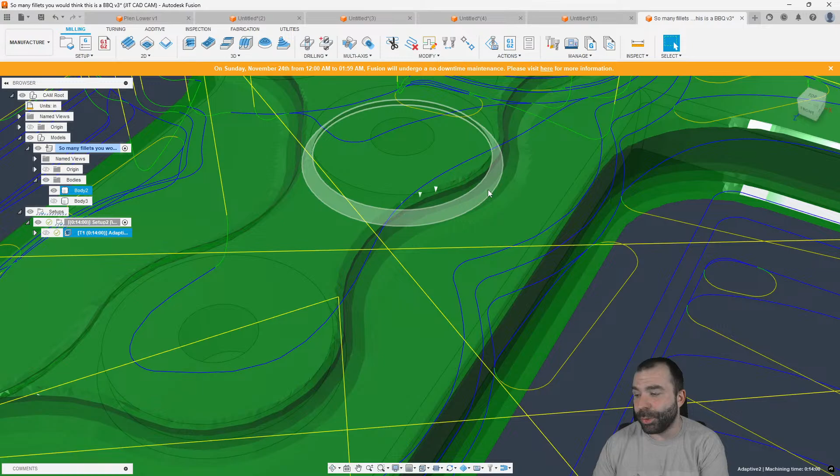On the combination of both models, you will see that certain areas are always going to still be there because it removed the fillet, right? It's not like it made the cylinder bigger, but out here on this external edge, you're seeing that it gave us a hard, sharp edge based on that information. Deep Thinker, I hope this helps a little bit. Again, using patches even and model, you could do this exact same thing.

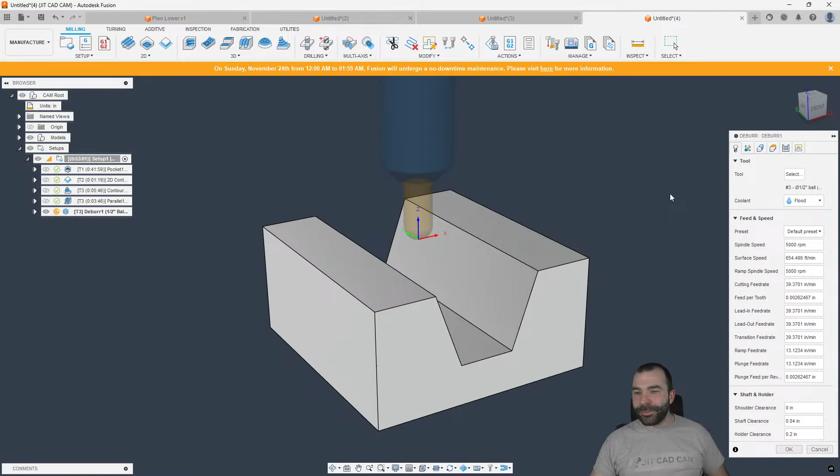It actually reminds me, so you have an awesome part like this thanks to Deep Thinker wanting a V block, but one cool thing about that V block is if you guys had the machining extension, when it comes into weird profiles like this, it is a blast to be able to go in and do deburr, right? So you could use your ball end mill, whatever you choose to use. Again, it's automatically going to go out and pick all the edges that it can machine.

And from there, based on the clearance of my tool, it will only machine certain areas it can, or I can modify from that what it can and cannot do. So I could say anywhere there is an unreachable corner, cut with tip of tool. We could also ramp this up to multi-axis. Now, for some of you, you're probably wondering why it doesn't go all the way down in these areas yet. Well, the idea is because we do have shaft and holder clearances.

So I would have to, in this tool's case, stick this tool out a little bit further. So let's go ahead and bump up that tool. Let's go and stick out length below holder to 2 inches. This is where I always get myself in trouble. In case you guys didn't know, I don't know how deep this pocket is because we completely winged it when we drew it. But as you can see now, that deburr toolpath is getting all the way down those hard, crispy edges and actually stepping out away from our part and machining those lovely little corners to break those edges with whatever we set.

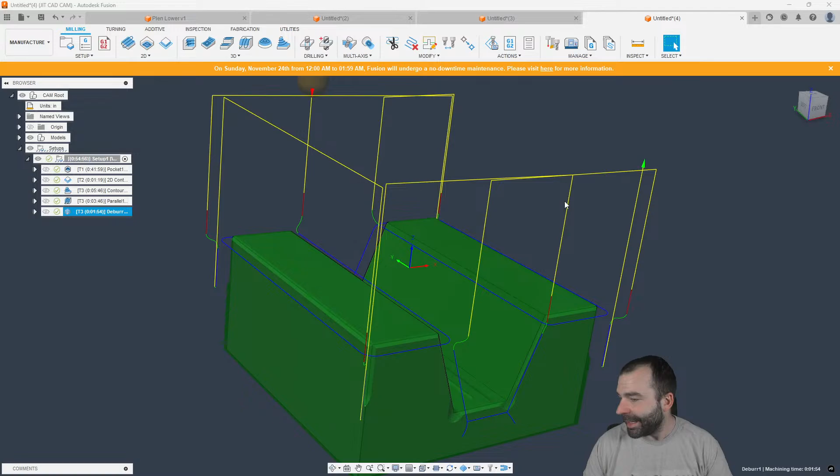All right, we're back. I see a couple of questions come through. Can you do a manual inspect and find the diameter of a ball? I can think of maybe a couple of ways we could do that, but let's go for it.

So if we create a sphere, a 1-inch sphere, let's see what we can do on the manufacture side of things. We're going to do a manual inspect. As you'll notice, I can't actually pick the sphere, but this leads us into a couple of things. So what I'm going to do is jump back to design.

If I really needed to find the sphere diameter, I'm going to copy and paste that sphere, and then from that, split that body utilizing my origin, or a plane. Now what you see is we have multiple bodies going on here.

But I think at the end of the day, if we go in and do inspect, manual inspect, I should be able to grab that edge. Now I can grab the flat, but it looks like I cannot actually pick it. Let's see. Yeah, so it looks like we can't actually pick that outside diameter.

So what you'd have to do is make a dummy profile to pull that off. Again, a lot of things you can and cannot do. I would honestly just make a square, I guess, and then utilize that info, and I could do that here.

So if we go back to the design side of things, if I had a box, what I'm going to do is create this very small. Let's just say this was my box instead, as a ghost image or ghost part. When I do that actual manual inspect, I can now pick the sides of my box, and then that box could be turned off.

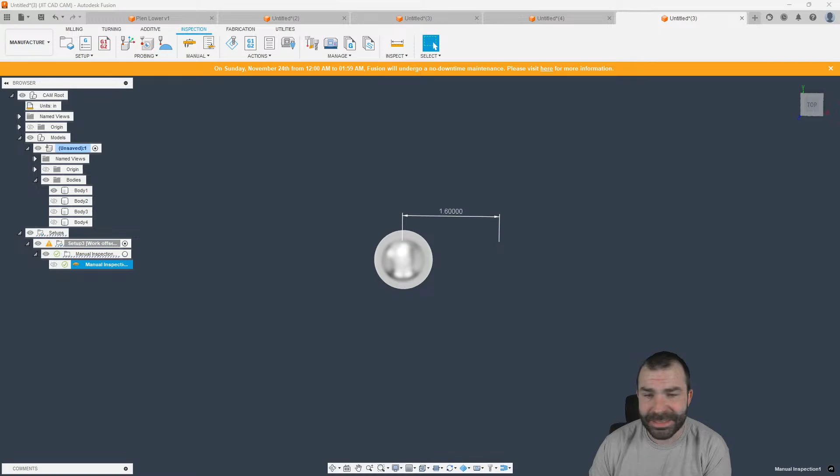I could actually, now thinking of it off the top of my head, let's do this here real quick. So what I would do, we wouldn't actually need to split that. We wouldn't need to duplicate it. I'm lucking out because I have a plane right here. So we could just do rectangle, center point.

Again, it doesn't even need to be one the other way, but if you wanted it to, we'll just go 1 by half. I'm going to go ahead and say symmetrical, just a wee bit. New body. And then we go back into our manufacture side of things.

Our manual inspect is now going to be based off this face to this face. As you can see, that's a very generic way to approach it, but then you would have your sphere dimension in Fusion. So I hope that helps.

I know it's not the best of situations because we're not able to pick up tangent on that sphere, but as you're seeing, we can actually create a different system to do that.

So Deep Thinker, I see another question on that V block: put an angled hole and generate the ball mill toolpath that would skip over the hole, don't touch the hole section. So you don't want to path on that, you want me to avoid that. No problem, so let's go back to the V block.

Let's go ahead and add a hole to this face, and what we'll do is scale that hole up just a little bit. Now if I go back into manufacture, what I'm going to do is first regenerate this toolpath. So as you're seeing, we're actually dipping inside of that hole.

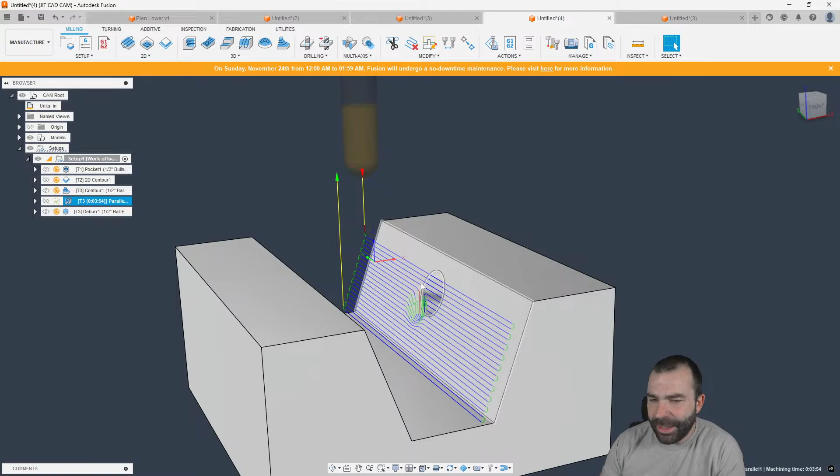And that's not what he wants to do—he wants to actually just skip over the hole, if I'm correct, Deep Thinker. Now, again, we can go back. We have that ability, contact only, where it only makes contact, but now we would need to change. We wouldn't use contact point boundary—we may actually have to say tool inside boundary, tool outside boundary. Again, my brain is not working the best at the moment, so let's go through and change a few more things.

Now we could use avoid/touch surface as well. I am going to attempt a few more things on this before I jump to that side of things.

Now it should be avoiding it based on contact only, and in this case you guys aren't seeing that. So what I'm going to do is jump further down. This is usually what I recommend people do, is start up here at the top as much as you can and get as far as you can.

Now, in this case, we're going to add in a surface to avoid, and this is going to be that surface. So now we could say avoid right here. With that, we should now be avoiding that hole, but we're still dipping in, and the reason is because we haven't given that hole any type of thickness. So it thinks of this surface as the side itself.

So this is where I may actually be better off in manufacture - you switch to design, create a patch on that hole, and then I could avoid this patch and create thickness. So again, if I go back to manufacture, we say this time I'm not actually avoiding that surface.

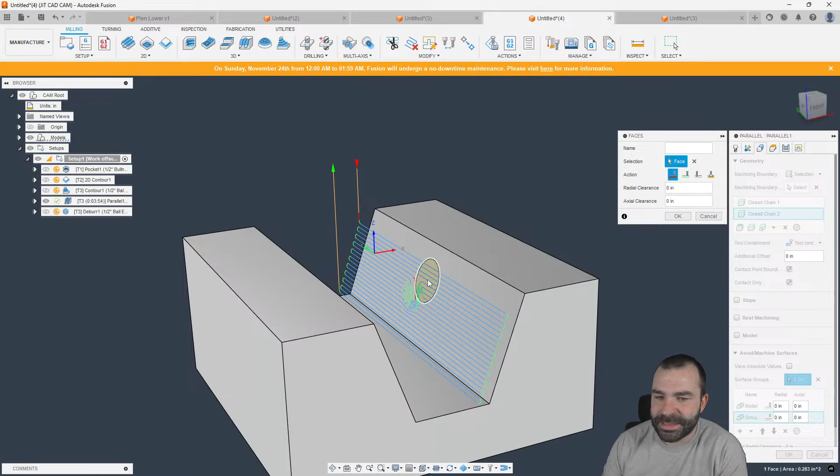Let's go in and edit. I want to avoid this surface. If I could pick that face - let's try that again. There we go. And then if I gave it some type of clearance, we would then stay away from that surface. Again, you guys are going to continue to see this where it's like, oh, I still want to machine over it. It's because you've never actually given it anything to stay away from.

So it's not completely going to avoid that surface until you give it something to avoid from, or a distance to avoid from. I've overkilled it there, but as you're seeing, we now are avoiding technically where that hole is. Keep in mind this toolpath is being calculated from the contact point. So if you're wondering why that blue line still runs across the bottom, the idea is that blue line is right about here, however the radius of the cutter is sitting way up here towards this top.

So I see Mads is asking about engraving with a ball end mill. Now with a ball end mill, are you trying to engrave like block lettering, or are you trying to do single point type stuff? Because in the event you're trying to do single point engraving, which would be like a sketch or single line text, if you use the trace toolpath with your ball end mill, that would allow you to actually create an engraving.

All based on single point. Now, if you're trying to engrave lettering using the engrave toolpath, what it's trying to do is create V profiles in the corners, and this would not allow that to happen. So the problem is you can't make a square corner or a mitered corner with a ball end mill, and that's what it's telling you - that's why it's giving you that error.

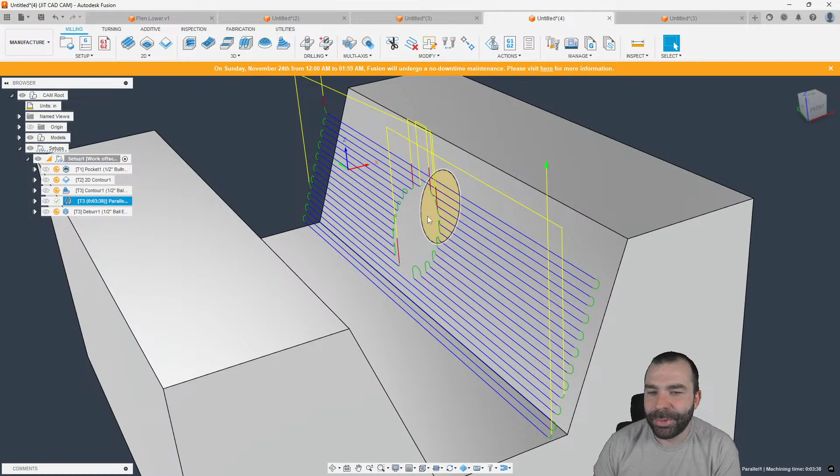One thing I think a lot of people don't understand is when you're doing that avoid touch surface, it's always projecting that based on 3 axes. So as you saw axial and radial, it's still thinking, even though the surface is at an angle, as if it was a horizontal projection outwards or a vertical, because you don't have a 3-dimensional movement there.

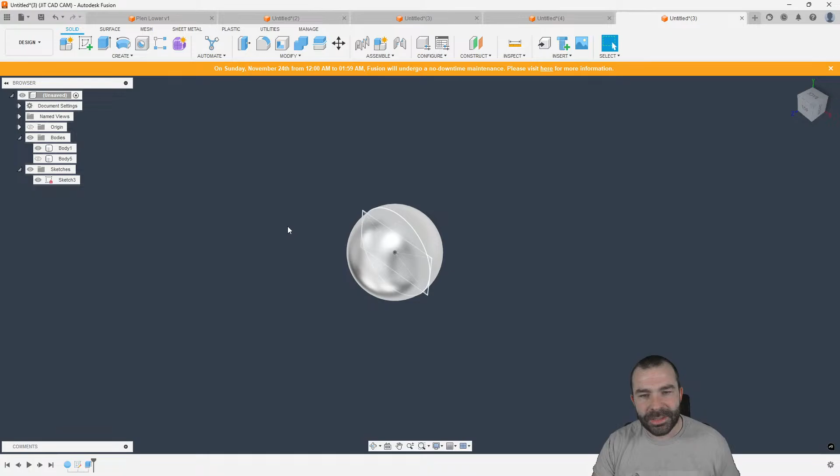So when we created that design, he's saying, what would happen if instead of using a rectangle, I would have created a cylinder? If I create that 1-inch cylinder, I'm placing that sketch tangent. But if you give that cylinder some depth, same concept, we'll say this is symmetrical. New body - now I have a cylinder floating around in the background.

If I go back into manufacture and do that manual inspect, we'll create a brand new manual inspect for this one, and grab that cylinder face - same concept. So as he said, what happens if you do a cylinder instead of that actual sphere? And it's still the same results - we're still generating that 1 inch diameter. We're just using a dummy solid or dummy body in the background, whether it be square or rectangular, as funny as it is, to create that point of interest.

So now I see, okay cool. So you want to make - we used to do this all the time in the old manual machining in the Marine Corps - you want to make a bolt, but you want to turn the outside profile. So what we would do is start by creating that profile for what we want.

So what I'm going to do is create a sketch, and this actually gives me a perfect opportunity. One of you left a comment on my video, and I highly appreciate it. When I usually draw my lathe parts, I draw a center line and then work externally from that center line.

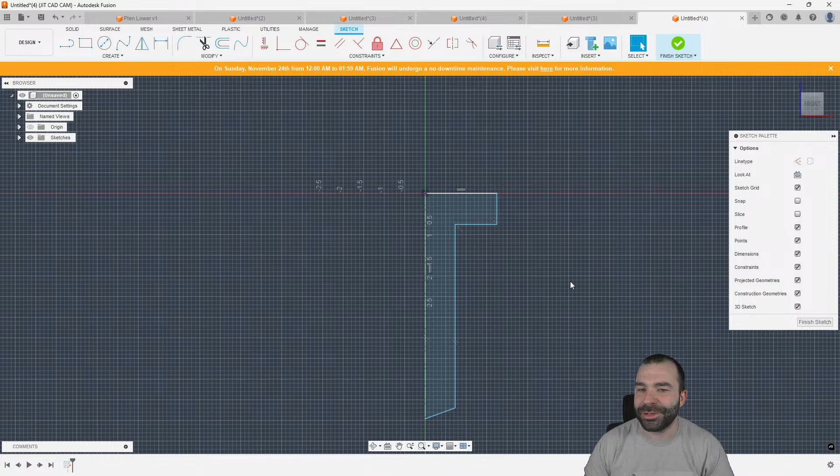But what that has saved me is so many keyboard clicks - when I dimension something now, if I want a 2 inch diameter head, it's now automatically referencing my center line out to that dimension. Now keep in mind, your center line, you do still have to pick the center line and go out when you do your dimensioning.

So if I had just a straight normal edge down here, if I try to dimension from this line to here, it's still radial. So keep that in mind when you guys are working.

Again, we'll go ahead and add a few more dimensions here. Let's just say this is going to be 1 inch diameter when it's finished. Actually, we're going to go a little less than that - let's go 3/4. And there's our terrible bolt, 3 inches long.

So what I'm going to do now is revolve said bolt. Now, I intentionally left something out because we're going to go back and fix it. But from here, we're going to apply another sketch up top. We want a lovely - where is it, I always forget which one it is - not spline, polygon. There we go.

So we're going to do an inscribed polygon. You could also do circumscribed - it's up to you, one is just internal versus external. So there's our 6-sided bolt. I'm going to remove the outside so that we have that hex head.

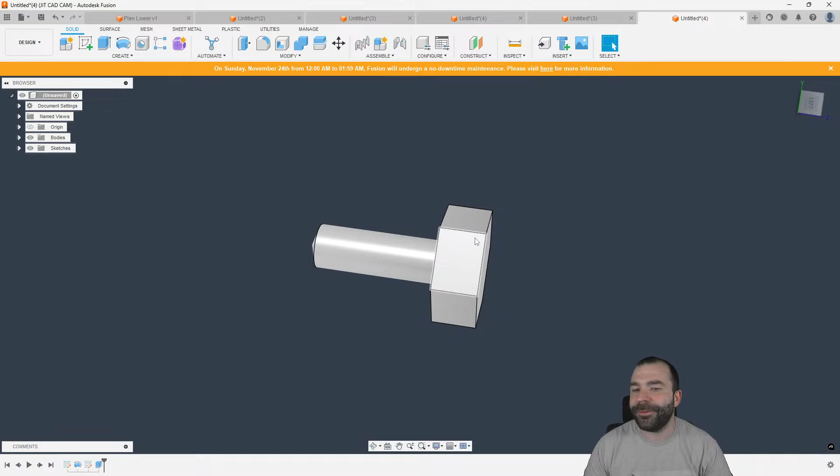What he was asking is about the head of these bolts. The old way you used to turn bolts, when you made them on a manual lathe, you would come in and turn the chamfer around the top here, then go to a mill and mill that. What I would do if I was trying to recreate that is both sides, as funny as it is, but I'd do that at my sketch level. So if we go back to the sketch that's now upside down and backwards, if I add in those couple of lines I want, I can create that profile.

I'm going to show you guys a couple of ways, but I'm only going to do one of these, right, and you'll see why. You notice how I have to create this line, I have to create an angle, yada yada yada.

I swear if I look over at chat right now, because I just saw somebody's chat come in, and you guys are about to say what I'm going to do, I think I'm going to lose it today. It's been one of them days. Y'all are done, I'm going to stop the stream. All right, good, quick question.

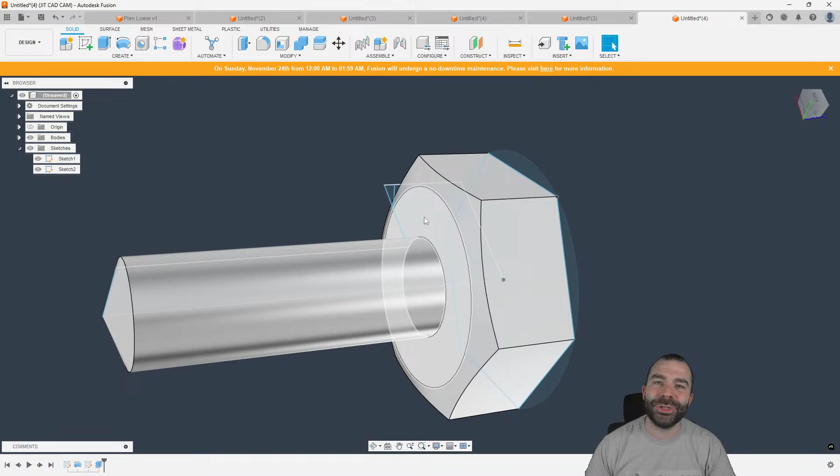So what you're seeing me do is I actually drew that profile. If we get that pulled up, right here is that revolved profile. So when I did my revolve, I now unselect said body, and now you notice I have that kind of undercut feature. Then because the rest of my timeline is still in effect, notice how it has now cut that chamfer. I know this answers the question, and it's not the right way to do this in my opinion, but it is a different way to think if you're new to Fusion. By simply drawing that little sketch there, I can create that bevel around my part.

But it gets better, because had we actually rolled back our timeline instead, from right after we revolved it, it's why I left it off the backside, do not, if you guys can, by all means avoid drawing your chamfers and your fillets. Because if I came in here at the model level and did a chamfer here, as you guys saw me do before, I could do a distance and an angle. So if I came in this far and wanted a 30-degree angle put on this, again very much an estimate, but as you can see, by changing my timeline and rolling it back and forward, I have completely broken this part, but it's fixable.

So what has happened, and the reason why my part has broke, is because when we created that sketch, it projected the edge furthest out. So what you guys are seeing me do is repair something that would have never been a problem in the first place, because I made the mistake of doing it intentionally wrong, to give you guys an example.

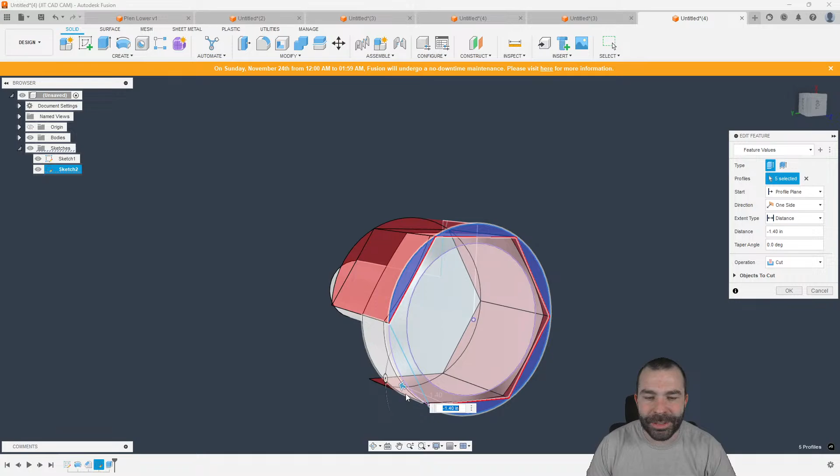So what I really need to do now is fix that sketch. Let's go to my sketch. Now I would project this outside edge, so now we have these little corners to cut out, which means we can now fix our extrude. What you're going to notice, buckle up, you got to bear with me here, but you're going to get the same results whether it's inside or outside. The idea is still the same. So based on the amount of chamfer, distance, and angle I've done, I've achieved that on both sides of my part. Hopefully this answers your question and gives you a couple examples of what to do.

Also keep in mind, I could have done an extrude instead of extrude cut when we did that hex. Had I done my hex larger than that cylinder, that would also allow me to do an extrude join. But nothing more than being able to revolve your part, whether you do the chamfer after the revolve or you sketch the chamfer, it's still the same process. You're just going to add that hex pattern at the end.

Yep, you machine those parts first op in the lathe, and then second, milling the hex. Yep, 100%. But as you can see, as I've created that cylinder, if I needed to go to the lathe now, I would go ahead and create my setup.

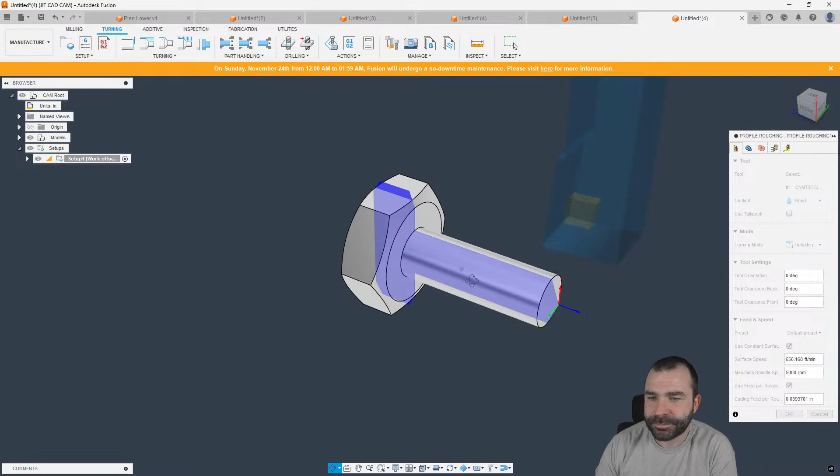This is turning. I'd like my Z the other way, I assume that's the way he's doing these. And then we have our stock and everything. So if I was to go in now and do my turning profile rough, grab a tool from the default library, right-handed cutter, that's going to rough out that outside profile. Again, we could then do our finish profile and so forth. That's where we're getting that angle and that spun profile.

So later on, when we take them from here, he's saying let's go ahead and throw it in the mill now. So I want to stand it up in my mill. We're going to go milling.

One nice thing is if you do things right in Fusion, like turn on continuous rest machining in your stock for your second setup, you'll notice my stock is now green, and I would go in and do my 2D contour around the part. Maybe I would turn on the stock so I can make sure we're only machining so much. Then we would go get yours truly's favorite tool if it's going to work on this part, and machine around the outside of that hex, right?

So again, it's very straightforward to be able to draw those things, model those things, and then move over in Fusion. Now, if he was making different size bolts and different size bolt heads, the cool thing is we've tied everything here all together. So if he was to go back to design and change anything in his sketch's profile...

Again, it's all up to the end user, right? So if he was to go up to like a 2.5 head diameter, depending on how my other sketches have played, as you're seeing, my model is absolutely broken in some cases, because my inscribed hex has not changed. But you would be able to walk that through the process and quickly create those results. I did not design this to be quickly changed, I wanted to show you guys just the walkthrough. I'm going to undo this just so we get back to a normal profile.

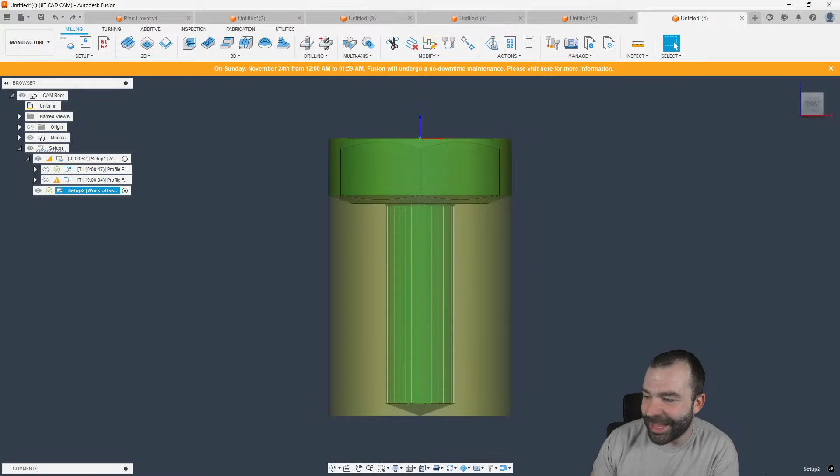It's not the first time I've had that question about, like, we do this on the lathe, we do that on the mill, and then it goes back to the lathe, right? But as you saw, once I had the model designed, the CAM side of it becomes very easy and simple.

Any other questions outside of that? I should probably scroll up, make sure there's nothing else. I do like that, deep thinker. That was a good idea, doing the cylinder instead of doing the box.

I don't think either one of us was a winner because I used the sphere tool. I think you would be the winner if I had to guess in the long scheme of things, because if I had to draw an actual sphere and was making a part for it, I would still do the same thing as you guys saw here, right?

I would do a centerline profile, and what you can see here is I can make this very exaggerated. Oh, we don't want to finish sketch, we want this to be our centerline. And then if I made my ball, usually I would then revolve this half. Again, create my revolve, 360. There's my sphere. And in the background lurking is still that sketch that I could then go through and create that extruded profile for whatever it is I needed on the manufacture side of things.

In this case, I believe Deep Thinker beat me to it, he's got the better solution, right? I'm just trying to put the square peg in the round hole.

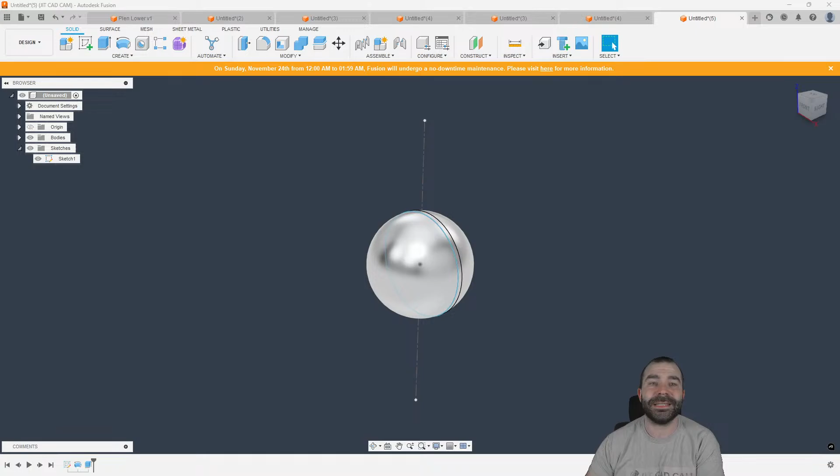Maybe I'll go back and continue to completely ruin this intake plenum. Again, any of those questions at any time. So as we're seeing, it looks like our extrude did not follow through. Let's see here. There it is. Yep. So it looks like when we broke that, let's go ahead and unselect, reselect, join, and away we go. Awesome. So now we have our lower, our upper. Anything else we wanted to do to it?

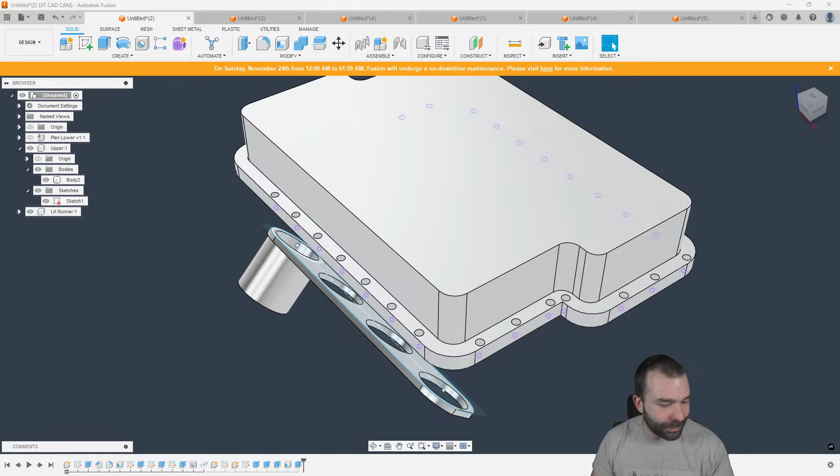I'm going to get this part. One sec. And I'm assuming you're on my live stream and you're sending me a part file, so I think we're going to be okay to put this up. Oh yeah, you even titled it Question for Fusion. Parallel to the... All right, let's download this file, and let's get it uploaded here.

I apologize if any of you guys hear my dogs barking in the background.

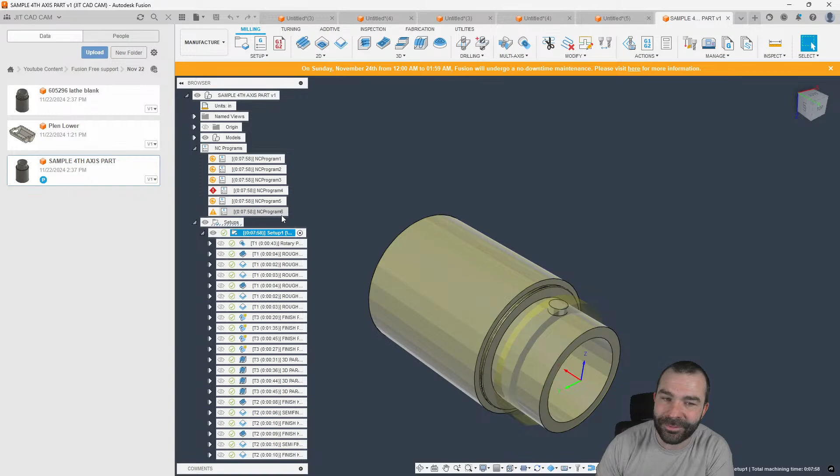Awesome. Little tip here, just so you know, Anthony, had you programmed the lathe part in Fusion and kept that all in the same pod, in the same file, you would have been able to pull that stock model over all in one shot. But so again, as he's using rotary pocket to clean out that area, not a terrible way to go. I like it.

Again, facing off the nubs. Looks like he's trying to cut around those areas and he's starting to realize that you can't quite tilt. And what other stuff do we have?

Okay, so with that being said, what I would actually say is I would possibly look at using like a swarf toolpath on something like this. And the reason for that is swarf is going to allow you to follow that lower chain, right? So if you go into an advanced swarf toolpath, you now have the ability to do fourth axis. Again, we're going to go based on the x-axis direction. I feel like I'm having deja vu because I just went over this a few days ago.

If you didn't see on our Facebook, we posted a video. It was for an internal side of this part. Not this part, but a very similar part.

So as you can see, as we're now setting that up, again, we can go through, and because swarf does allow you to pick a surface, the only problem is going to be trying to maintain that around and vary in our Z height. So if this doesn't work, we might have to look at doing something like a trace toolpath, right? As you can see, we're going to go ahead and hit OK. And in this very simple situation, we've of course got an error here. And that error is probably more than likely not going to allow us to do it.

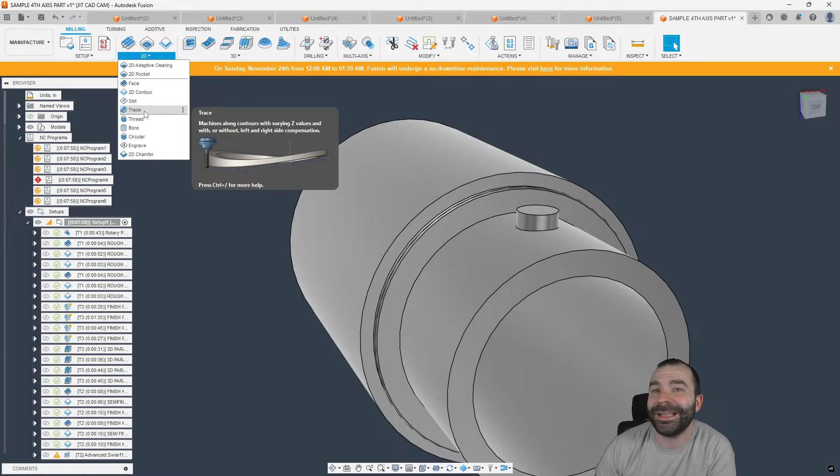Which would lead me to believe that we could go in and we could actually do this with trace. Now, the reason why I would look at using trace is because it is allowing Z axis up and down, right? So we have a curve to work off of. Now, we do need to, very rarely do I have to do this, we need to turn on compensation. And then from there, we should see that tool come down and go up and around. Now, keep in mind, because of the way that tool is actually working, we would never be able to get that tool lower than that lip, right? Which is part of the problem that you've probably encountered, right, Anthony?

But as you're seeing here, we'll give him a second to answer, because he has gone in with 2D contour and kind of attempted the same thing, which means in his 2D contour, the difference is he's only going as low as the highest point, in this case, on the bottom of that. Where if we compare that to the trace toolpath, you kind of see how this trace toolpath is bowing down. Now, it does look like he's protruding into his part just a hair, but that trace toolpath would be good

to get you close. So we do need to, in some way, shape, or form, now clean up basically this surface, which would mean we would need a toolpath that's going to hold the tool perpendicular to this face. So I think he's already done it. Now, I would look at something on this part as using rotary pocket or rotary contour even. Now, what that actually has, and I think a lot of people overlook this, is when you're actually machining, let me make sure I'm talking about the right thing here, because usually I get that wrong.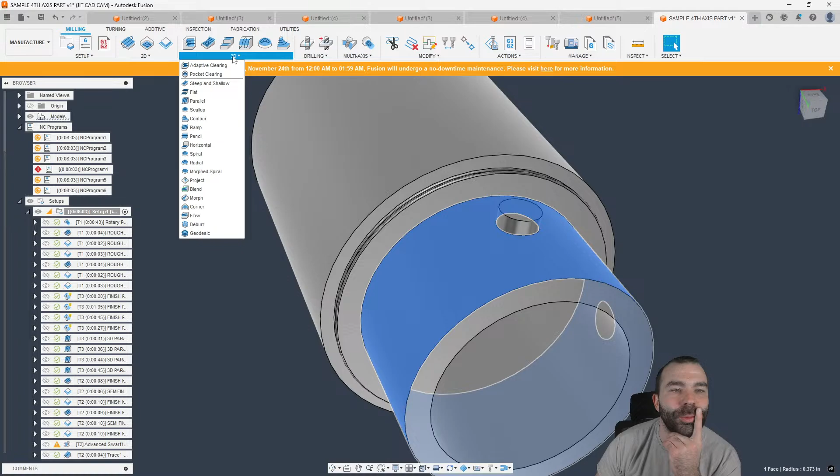Nope, not rotary contour. Where is it here? Trying to think off the top of my head. There's an ability to actually set it to machine based on a certain point on that tool. And I think it is fixed tone, or no, that's for, let's see here. We're going to go x-axis. You know, it might actually be in another toolpath. Go with parallel here. In the meantime, if any of you guys have any questions, feel free.

Yeah, here it is. Okay, so based on your tool axis, you have what's called to rotary. But what you may want to do is do a to curve type of method. And what to curve is, you're going to point the tool at the curve itself, right? Now, it's not going to work because we're going to be deep in the corner here. And you'll see that it will look actually quite wild when we set this up. But it's still the same concept, right?

So if we said set up X, I want to point the tool to a curve. And then I don't think it's going to allow me to do it with the old flat. Yep. So again, the idea is to curve. The reason why it can't point it at the curve is because that curve is smaller than the profile that we're trying to cut, and it doesn't know how to point down that tool. So we may have to do some Hollywood magic in some ways.

Let's go ahead and give this a try with a sketch. And now a lot of you guys are probably wondering what I'm doing with the sketch. We're going to go ahead and do a project 3D. And then can we do an offset of a 3D profile? We cannot. So we may have to play around with this a little bit. Anybody else have any questions in the meantime? This is going to be the one that I got to run out for the last 16 minutes to figure out the best way to get around that lug.

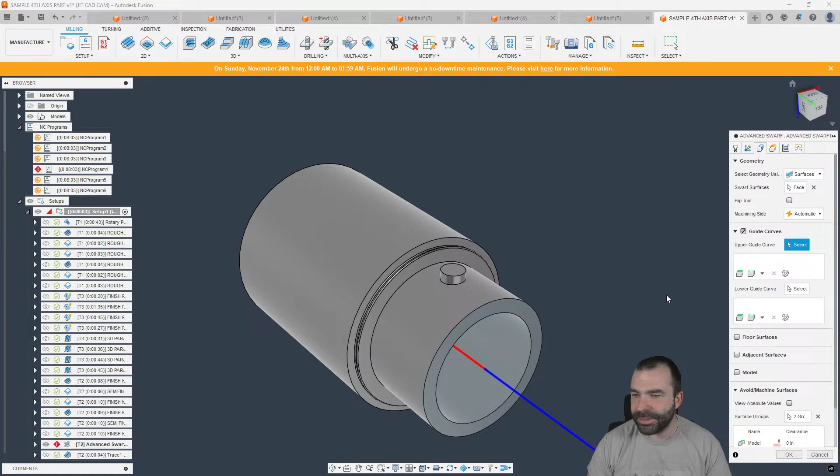Again, let's go ahead and take a look. Guide curve. Let's go lower. Floor surface. Track floor. See if we can get it with 5-axis, if it's 4-axis or 5-axis. Oh, looks like we still have empty toolpath. And of course, we're not getting any notes on this. The good old Autodesk, guys, if you want to add in some better notes as to why this may or may not be working.

And I think I have some ideas on it, but we're going to go ahead and continue to play with this. Let's see. Yep, we don't need clearance. Don't need extension, blend. We're going to go from bottom. I still don't think it's going to make a difference. But you could wrap a 2D toolpath. I figured one of you guys were going to ask that. The problem is going to be if you do 2D and you do a wrap, right?

What is going to happen is with that wrapped toolpath, the center of the tool always points down to the center of the profile. So what's actually going to happen, and I can draw this better than I can explain it, it is going to get you close, and it's not a wrong answer by any means. But what is actually happening is based on that tool, and if I draw this, a 3-point rectangle, I'll show you guys, right?

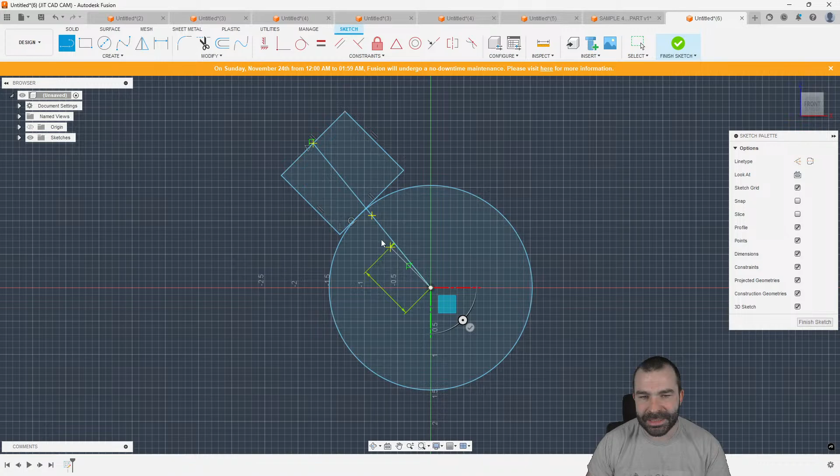So let's just say this is my end mill, right? And again, based on the center line of my profile, that is what's going to align to the center of my part, right? So if we had a feature here, oh, parallel to that guy.

So again, with that shape that he has, that shape is coming off of center, but as you can see, this end mill still has this little bitty area here because the edge of the wall that he's trying to machine is going to come outwards. Now, it's not going to come outwards at this angle when you think about it. It's actually going to come outwards based on something like this because, again, it's a lug that's on center.

So as this end mill makes its way around, maybe I can make this so that it will tilt. Not so much, but what you're seeing is you're never going to get this front edge to get down in there, right? Because Fusion is calculating from the center point of the toolpath, not the edge of the tool.

Yes, that would be nice. Would it work if you put a fillet in the radius of the corner? Well, if you had a fillet in the corner of this profile, right? So if we go back to design and I throw on a fillet, how big can we go?

0625? Well, that's overkill. 03125? That's a little better. So as you can see, if there was a fillet there, a round tool would be easy as can be. So if we were to manufacture this, I would still tell people to go back. You're still going to do like a trace toolpath, or you're going to do a kind of a blend toolpath. But our curve selection could be here.

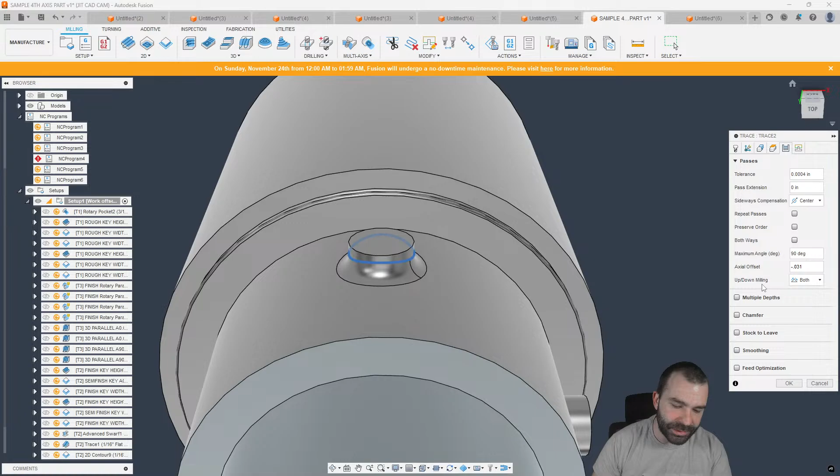This only works, guys, because I know the math on this. So we're going to go ahead and say 1/8 inch ball. Where is it? And then we are going to say we want an offset of minus point... what did I do, 03125, right? 325, but we're going to actually need to do a smaller tool if I remember.

Oh, and we need cutter comp on, right? Cutter comp left. As you can see, again, with that ball end mill, I'm using too big of a ball. I designed this based on, we would actually be using a 16th inch ball. Let's swap that out.

But yeah, so now you can see that tool would come down. And then you would see it trace up and around, and that would take care of that blend, right? As you're seeing, we would still need to blend into that in some way, shape, or form, which we could obviously do with multiple passes now or something of that nature.

But for a clean, square-edged corner, it's going to be tricky, that's for sure. Because what we need is, like I was showing you guys, is we need to be able to define this as our contact point, not the center line of our tool, right? And I'm really trying to think, what tool... I get this question I feel like once every 3 months, and I got to completely change how I think about how a toolpath works or how to utilize a toolpath to do that.

In the meantime, is there any other questions out there? I see more and more people coming in and going out, and it seems we're closing in. I think on the record, the record's 145 views in a 2-hour session.

So let's, oh man. Actually...

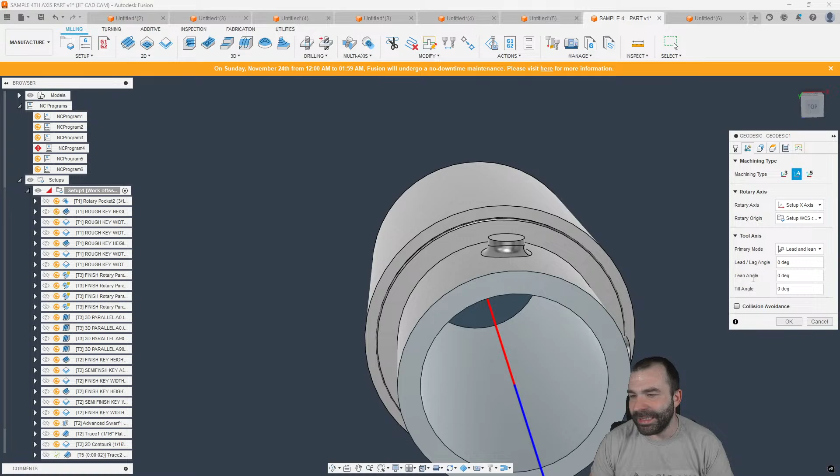So you wouldn't even be able to do it that way, I don't think. Because with your fourth axis, ZX, X-axis, yeah. Because even if you did lean and lead, you would still need to know the actual tilt angle to achieve that, right? That would be the hardest thing about it, is how are you going to be able to go in and achieve that thing, right?

Because even if we combined it now, I'm going to have to regenerate all of this. Let's see, okay, so let's do this. No offense to everything that he's done up to this part, we're going to delete it.

And we know advanced swarf is still giving us problems. And of course, yours truly is now picking the wrong profile. So let's go ahead and switch this. Let's go ahead and say this one is actually the profile we want. That's because we modified that model, right?

And orientation is now over here. There we go. And then we did do that wrap toolpath. Yes, wrap toolpath is actually going to go over here. How do I feel like that's going to be?

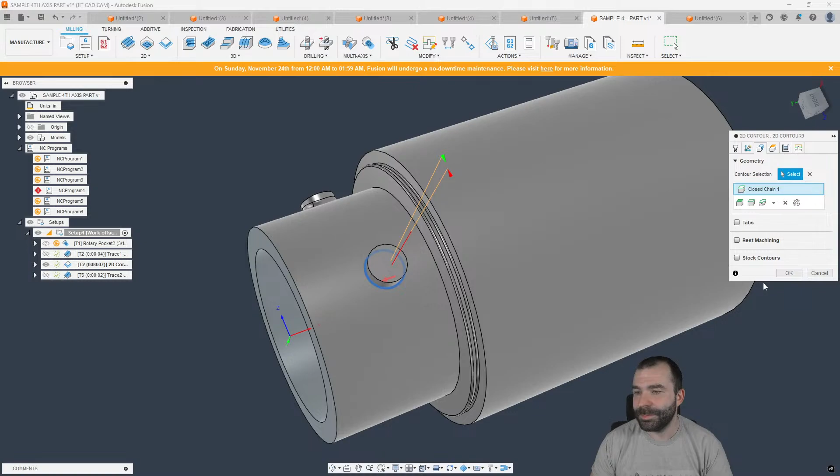Oh, now it's the opposite. Guys, it's legendary, I'm always backwards. Direction. So even though we went ahead and did it with these two toolpaths, right, we've tried our best to do it square to this face.

And then again, because we're centerline, we're still pointing that tool to center. We're not able to say based on that outer edge... if we simulate this, I might have to turn my accuracy way up, or we might be able to see and give it to us today. Yeah, I'm going to have to turn my accuracy up because I don't think we're going to be able to see that little bitty cusp that's still sitting around the outside of the part, right?

Let's go tolerance down to, it's probably less than a thousandth, right?

Yeah, we're going to have to turn our accuracy up. Nope, you're seeing it there. All right, so we are seeing it. You see how we're still just not getting that one little spot right there? That is the problem we're going to sit here and fight.

And you can actually see it now in this angle, because you have that tool with the wrap versus the tool with trace. There's this ever so slightly little nipple, or this little dimple, kind of hanging out right here.

I may have to take this one offline and drive myself crazy all weekend to remember how I always have to overcome and do this. Any other questions out there by any of you guys in the meantime?

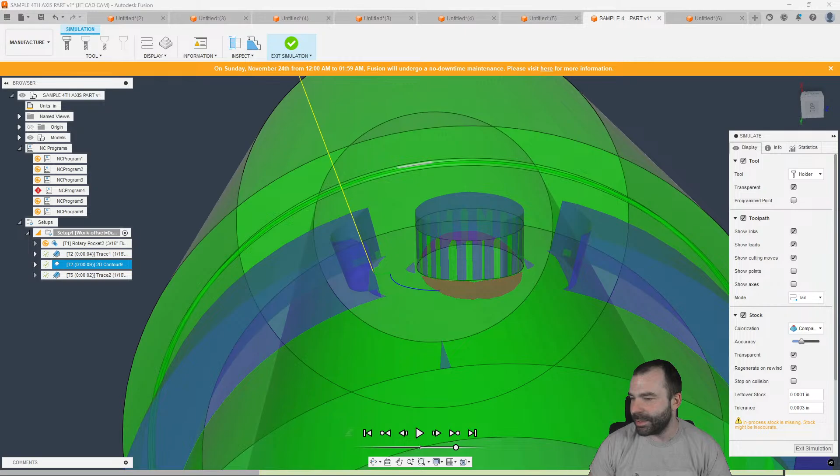Just running through all of the different channels to make sure nobody's putting out any questions. Cool, awesome, let's go ahead and jump back over. I don't see any new questions populating inside of there, so let's take a look. So, one thing that may or may not work.

Yeah, I mean that's the way most people would do it. Deep Thinker, you're not wrong, is trying to trace it with the smallest tool you have, but you're still in that realm of always leaving that little nib.

As funny as, I'm just trying to think, a lot of different ways to do stuff, and I'm trying to remember a way to do it. You guys always ask me the best question.

Because even if you did scallop and you did fourth axis, you're still stuck to the same confines, right? Are you doing from curve to curve, yada yada yada. But going to rotary axis, you can add additional tilt. But what you can't do is actually say it's a set angle. You would have to measure that angle and hope that you can, right?

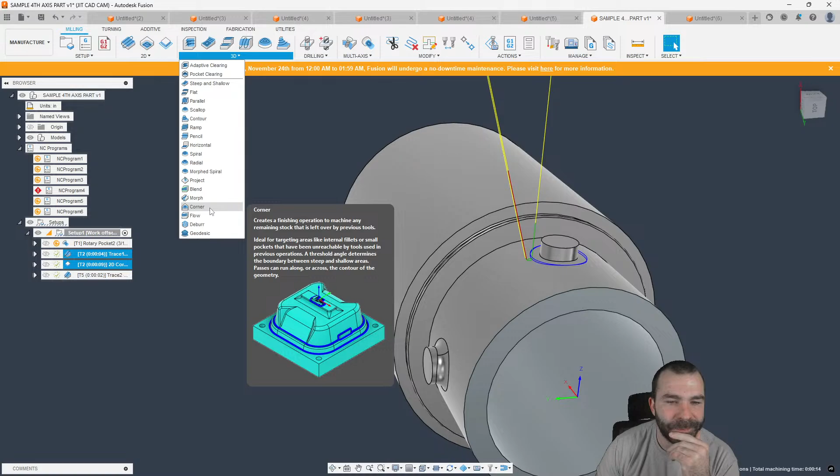Trying to think what other toolpaths would allow you. Because you can't define based on the edge of the tool, you're always defining based on the center of the tool. Give me...

You might have stumped me here for a moment, and then I'm going to have to show everybody how to do this next Friday. I'm really trying to remember off the top of my head. It's been one of them weeks.

Any other questions for you guys? Anything at all? I don't want to end on a bad note. We're down to the 5-minute mark, right? You guys are making me sweat.

Oh, that wouldn't even work. Trying to imagine what would be the best way to achieve this.

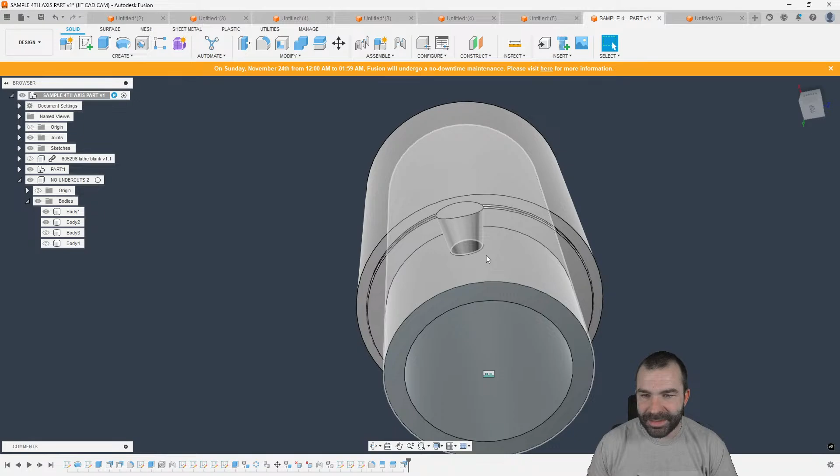Because that's what we want, is the shoulder of the tool to basically do that, right? Even though this is technically the profile that we're trying to cut. And we can actually change opacity.

That kind of makes sense to you guys now? That's really realistically what we want, is the tool, the side of the tool to follow this profile, right? And we might be able to actually fake it out now using advanced swarf if we're machining the right body still.

Okay, advanced swarf, 4th axis, this surface. Maybe. Oh, we need to rotate around. Yep, still mad at me. Still mad at me. Sometimes gotta go back to the OG stuff.

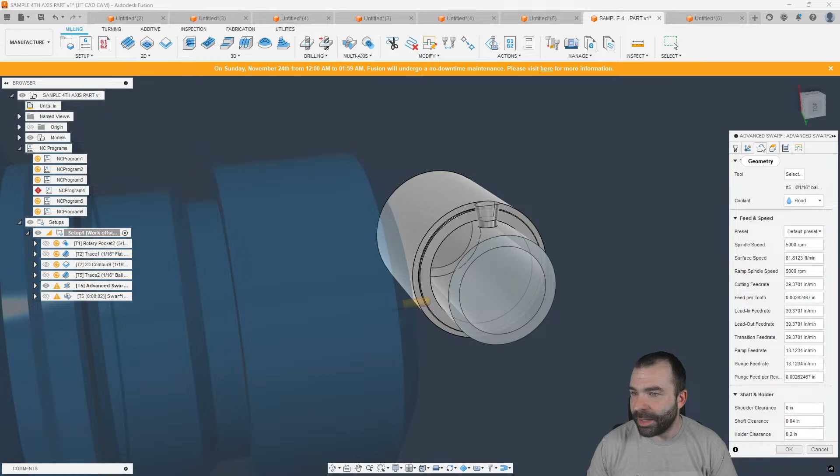So I do see a couple of questions coming in. All right, hold on here real quick. Do you guys see this? First off, I am using normal swarf to do this, which seems to be a possibility. Yes, so let's see if we go guide curve. I'm just kidding, you force this.

So the problem is with advanced swarf, this is kind of what we want, is the tool to use the side of the tool, which is why we're choosing a swarf toolpath. But we want it to chase this profile so we're actually getting all the way in here with the square end of the tool. So if you're wondering how this math is done, or Autodesk, if you're watching this video, it'd be nice to be able to define the actual edge of the cutting surface, not just the center line of that tool when doing this.

Or yours truly is completely wrong, and one of you all are going to tell me in chat the better way to do this, and I fully support you. But to give you that comparison, as you can see, that tool now traces all the way around. And now this toolpath looks weird. Keep in mind, what we're really following is this edge, because that's where the square part of our flat end mill is touching. So we're getting that blend based on that.

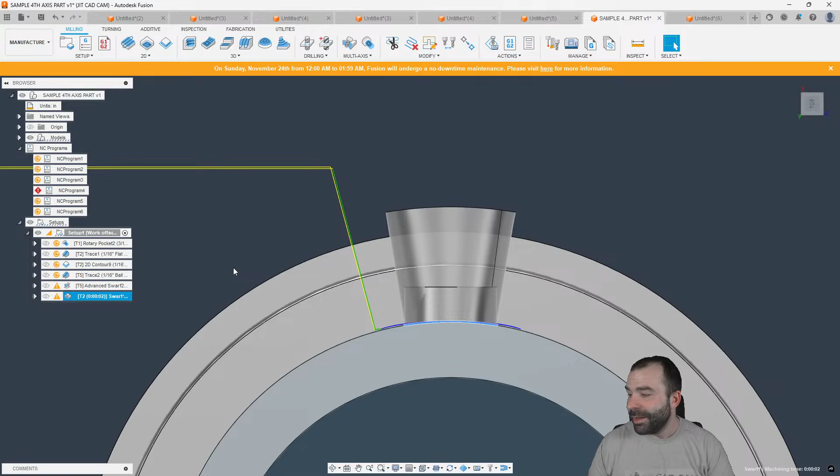How do you ensure soft jaws always locate properly when removing and replacing them from the vise? What I would do if I was you doing soft jaw stuff, Ash, is make a locator hole, or as Matt's saying, put a dowel pin between the two. Personally, what I usually do is leave my front jaw a little loose so it self-aligns. The one I care about is the back fixed jaw. Once I put it in there and put my part in, that front one can wiggle a little bit and actually lock itself down.

Any other questions outside of that? I know this is a little crazy to be looking at. We are coming down to the wire, we just hit the 2-hour mark. I'm not going to completely cut you guys off yet, it's 3 o'clock on the money. We'll play around with this for a few more minutes and see what we can come up with. I would like to get a tool path here, but I just don't think it's going to happen with the old advanced swarf.

Any other questions? Opening up the floor. I see Matt made it in here this week, it's always great to have Matt in here. He's the one, if you guys didn't know, the reason why I made a video on doing broaching on Wednesday, because he had a genius idea on how to do it with the trace tool path.

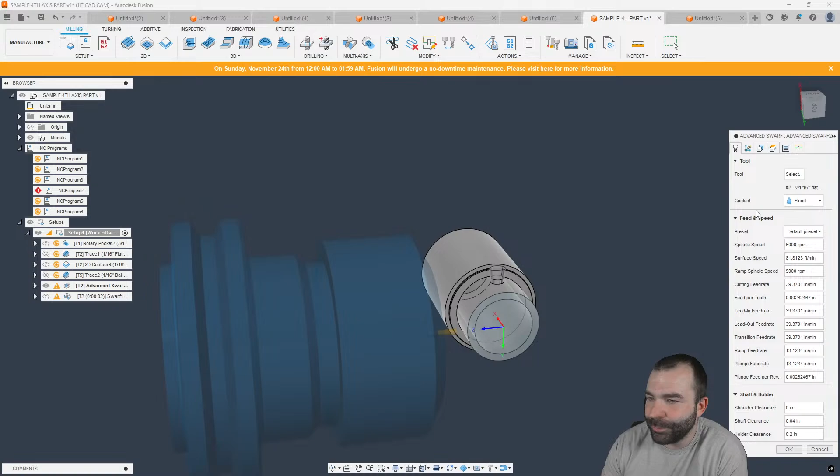It's funny that I can't get fourth axis to work, which the fourth axis add-on has been a newer thing, fourth axis and advanced swarf. But I can definitely get the old version, which I guess would be a good thing. Can I go 5-axis here? Must be yours truly picking the wrong stuff, because even if it won't do 5-axis, do tool orientation. Do I have to point Z this way in order for this to work? I'm gonna laugh if I do. Nope, still nothing. Empty tool path.

Let's do what we always tell people to do, right? Brand new tool path. We're going to do advanced swarf. We are going to do this with 5-axis surfaces, this guy. Guide curve, upper. Actually, you know what, we're not going to do guide floor surface. Nope. This tool path just hates me. I'm going to have to play with this over the weekend and bring it back up to you guys when I get a chance.

Obviously, I hate to leave you guys on a bad note, but at this point I'm going to do my outro, which means one of you is probably going to ask a question here at the end. I do appreciate all of you guys jumping in and seeing this. If you haven't caught on yet, we've been doing live streams at least twice a week, Workflow Wednesdays and Free Support Fridays.